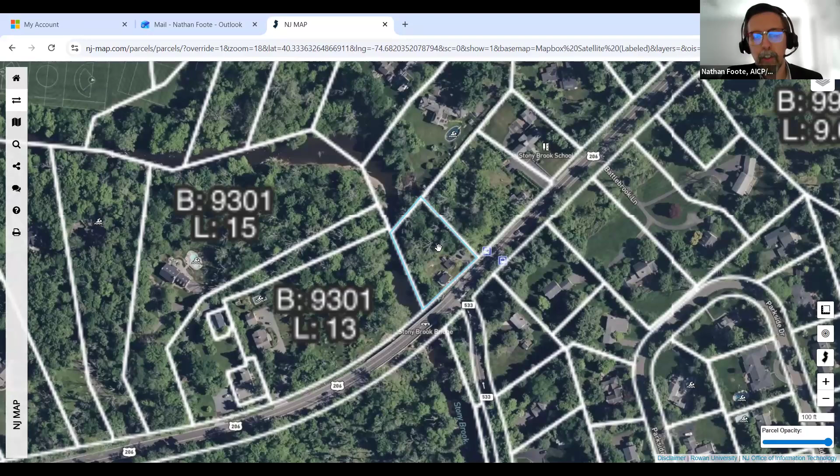Why don't we treat this as a formal hearing? We'll mark this as exhibit PB1. If you could identify it - yes, sorry, I had that in my notes and forgot to say it. This is an overhead image, a map from the NJ Parcel Explorer website, created by Rowan University. Thank you, and it's an overhead image of the two properties in question, with lot lines delineated for the lots in the area. Correct.

So now moving on - I've stopped sharing. Planning Board approved the findings of fact for the project on December 19th, 2024. Per the municipal land use law, an applicant has 190 days to record the subdivision with the county before the approval expires. Therefore, the original deadline to file the subdivision was June 19th, 2025. The applicant requested an extension on May 30th of last year, and the board granted that request at its meeting on July 17th.

Of 2025, and the resolution for that was adopted September 4th of last year. The resolution concluded that the board voted to extend the filing period to be determined by the board upon further application once NJDOT approves the subdivision plan and the dedication. The length of the extension will be the time period occasioned by the NJDOT delay. For clarification, NJDOT is the New Jersey Department of Transportation.

The main reason for the involvement of DOT was there was right-of-way being dedicated, from Route 206, which is under NJDOT jurisdiction.

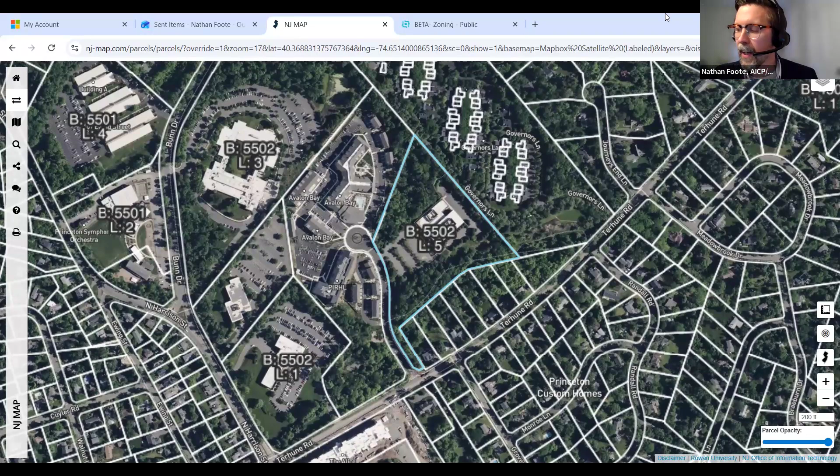I see, okay, fine, this will be the first one. Okay, so this will be PB1. Yep, so this is an overhead image of the subject property along with the surrounding area, prepared by the NJ Parcel Explorer website, prepared by Rowan University. And as with the previous image that we had for the Wascow extension application, this has the property lines and identifies the roads as well. So as can be seen here, you can kind of make it out.

It's highlighted in blue. It is an irregularly shaped lot identified as 29 Thanet Circle and is Block 5502, Lot 5 in the municipality's tax maps. The property has frontage along Thanet Circle, although a portion of the lot, it should be mentioned, stretches along the Thanet Circle frontage down towards Terhune Road, as can be seen here. It is currently developed with a multi-story masonry building that you can see towards the rear center of the property.

This masonry building was previously utilized as an office building, but is currently vacant. The property is also developed with access drives off of Thanet Circle, as well as parking lots to the front and rear of that existing masonry building.

The property is located in the AH14 Affordable Housing 14 zone, which was established in 2025, that is last year, and amended earlier this year.

The property is adjacent to the IRA Inclusionary Rental Apartment District, developed with the Avalon Princeton Circle apartment buildings. It is also next to the RSA Residential Senior Affordable District, developed with the Princeton Senior Living Affordable Apartment Building. The Governor's Lane multifamily housing neighborhood, located in the OR2 district of the former township, is to the east and north of the site. Several single-family houses fronting Terhune Road, located in the R5 district, are to the immediate south of the bulk of the property.

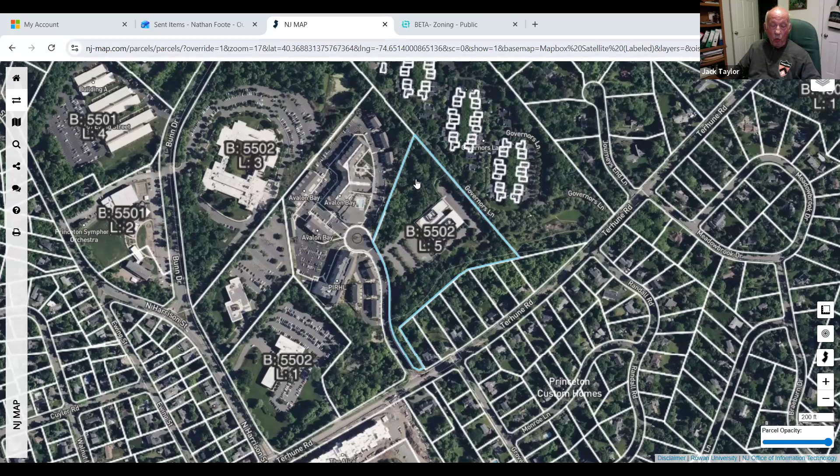Although I'm a regular driver on Terhune, I've done it 100 times, I've driven by this site so many times I can't count. And what I never really focused on is Harry's Brook. This morning when I took a walk through the woods, I was absolutely amazed at Harry's Brook, how wide it was at the very top, how deep it was, how wet it was in places. And the location of the tributary that's referred to is literally in the front steps of the building that's about to be constructed. So could you show on the map where Harry's Brook is and where the tributary is? Because I think given the stormwater management plan and related issues, we need to know that.

Certainly. So I can't identify Harry's Brook on this overhead image, but I will point out the tributary that Mr. Taylor has noted. That runs roughly where the cursor is moving right now, and as mentioned, it does go in front of the existing building. There are a number of easements on the site, several conservation easements included, which does include that tributary, both on the north side of the property where the tributary runs through, and then in front of the building, and then over through to the south side of the property. So that's the tributary that runs through it.

Harry's Brook, what I might do is just defer to the applicant to show that in their presentation. I believe they would be showing that. I will also note that both Mr. Purcell, our acting land use engineer, who's already spoken on the Wasco application, as well as our stormwater management consulting engineer, is also on this call to provide feedback and testimony.

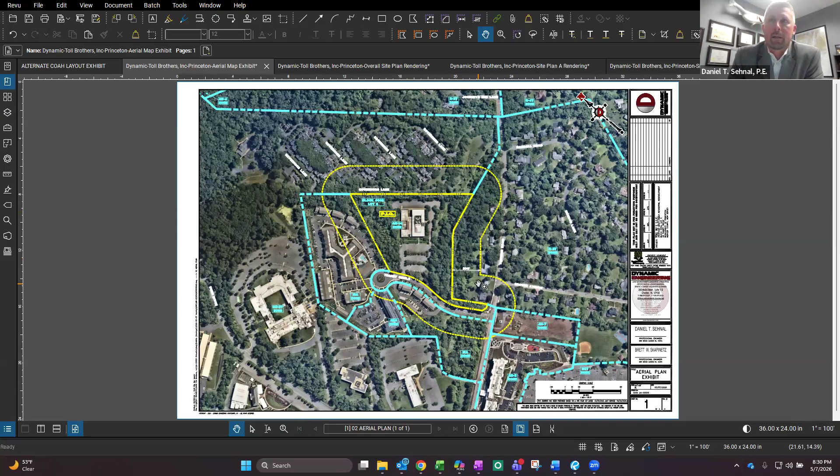Well, off the top of my head, I'm not sure what slide number this is, but this is an aerial plan exhibit, essentially showing the existing conditions of the subject site and the surrounding area. It's more or less identical to the aerial map included in the site plan set in conjunction with this application. It is identified as the aerial map exhibit with today's date, May 7th, 2026. Just for orientation purposes, north is considered to the top right-hand corner of the page. The subject site itself is identified in the center of the site, the irregular shaped lot you heard about already, in yellow, the bold yellow line with a Thanet circle at the bottom of the page.

So you've already had an opportunity to hear about the surrounding neighborhood and the zoning, so I'll bypass that information.

The site itself is just over 9.25 acres in size. The unnamed tributary, as you heard, goes from a northern direction to a southern direction, where it connects into the Harry's Brook tributary branch 2, which runs on the easterly property line of the subject site.

Thanet Circle makes up the main site frontage. It's a cul-de-sac with 2 travel lanes plus bike sharrows, under the jurisdiction of Princeton with a 25-mile-an-hour speed limit. The site also has a very minor frontage on Terhune Road, which has 2 travel lanes in either direction under local jurisdiction with a 25-mile-an-hour speed limit.

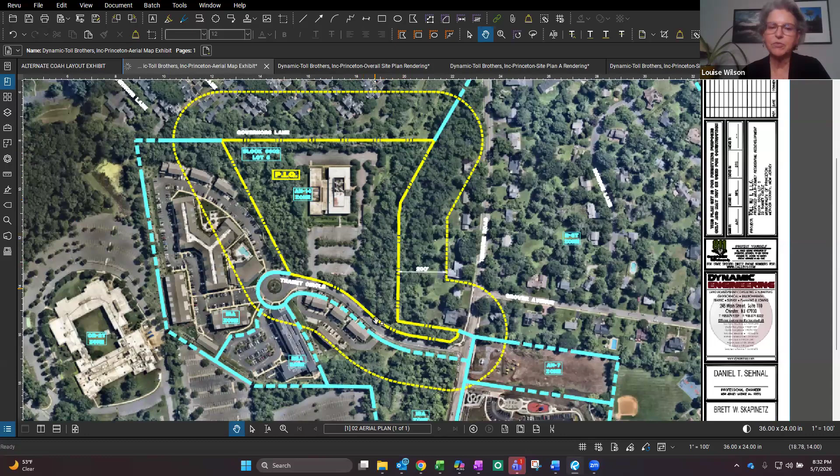I'm sorry to break in, but you noted that Harry's Brook runs on the easterly side of the property, but I think you mean the southern part. Do you not? Yeah, southeasterly. It runs west to east, roughly, right? Yes, correct. Okay, so this is the southeasterly property line, and you have northeasterly at the top. We're skewed a little bit with the page orientation, but you're all right. I'm sorry, I didn't mean to interrupt the flow.

If anybody has questions, feel free to interrupt, I do not mind. Access to the site is currently provided via 2 full movement driveways, one at the northern end of the Thanet Circle frontage, the other covered by tree canopy, opposite a couple of the townhomes for the Avalon Bay development. Pedestrian access includes a sidewalk along Thanet Circle, which provides pedestrian access through the site.

The site currently has a vacant multi-story masonry office building with a footprint just over 30,000 square feet, and there's an associated parking area for about 190 vehicles.

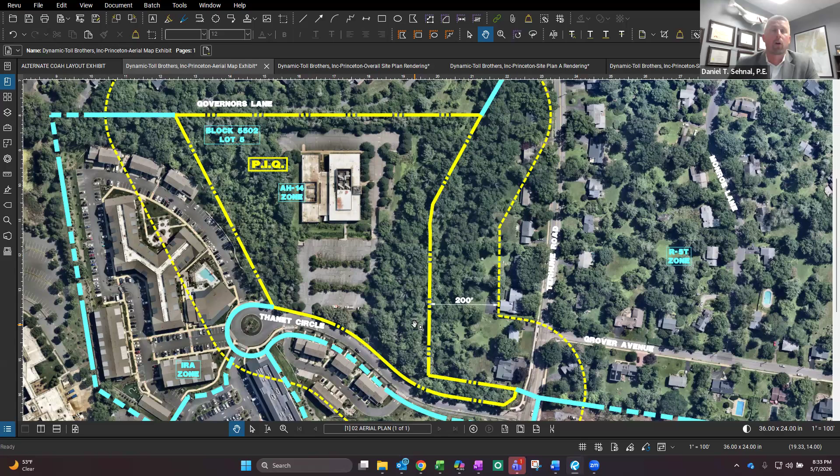There are 2 on-site bridges. One is located on the southern side of the existing office building and is for vehicles. Right in front of the existing office building, there's also a pedestrian bridge, which provides access over the top of the tributary that goes through the center of the site.

The front and rear of the site are moderately sloped towards the brook. The highest point of the site is along the rear property line, up along Governor's Lane, about 20 feet higher than the low point of the bridge that crosses the brook. Along Thanet Circle, that's about 10 feet higher than this bridge. So the site is almost shaped like a funnel.

All the stormwater goes towards the center of the site, where it's collected by various existing inlets and conveyed to an existing detention basin. There's an above-ground detention basin located in the easterly corner of the site, which captures the majority of the stormwater runoff generated by the site. It holds that water back, detains it, and releases it at a controlled rate back to the tributary to the Harry's Brook tributary. So there is existing stormwater management infrastructure on this site that captures and detains the stormwater currently generated.

We did prepare a phase 1 environmental site assessment here. No areas of concern were identified. We also have a wetlands LOI from the New Jersey Department of Environmental Protection. There are some wetlands on the subject site, which run adjacent to the tributary going through the center of the site. Those wetlands have a 50-foot riparian buffer, largely contained within the conservation easements associated with this site, which I'll get to shortly.

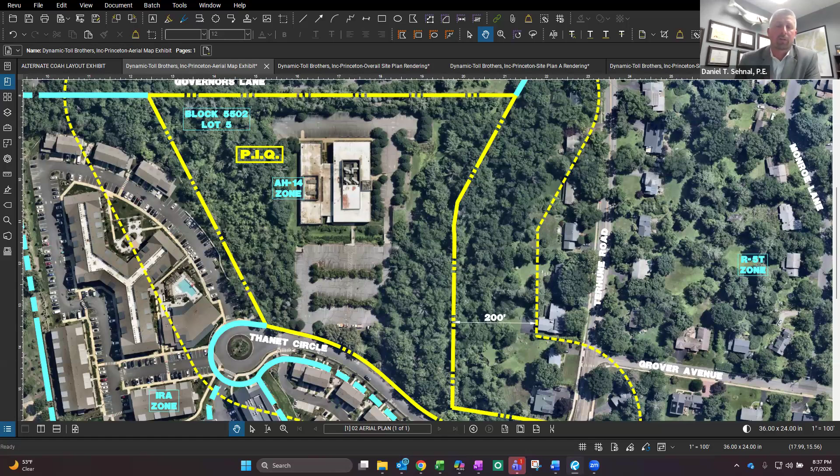With that being said, I'll take a moment to switch over to my next exhibit, unless anybody has any specific questions about the existing conditions.

That was slide 1. We'll call this one slide 2, titled Overall Site Plan Rendering, also dated May 7th, 2026. This is a colorized version of our overall site plan, which is sheet number 6 within our site plan set. Orientation remains the same.

You have Thanet Circle at the bottom of the page, and the darker shaded green areas will be the limits of the site in question. The brown or tan colors are proposed buildings, the dark gray would be pavement, and green space is obviously a landscaped area.

Under proposed conditions, we are seeking approval to demolish the existing improvements associated with the office building for the construction of 10 stacked townhome buildings, which will include 2 affordable buildings. In total, we're looking at 85 total units, 68 of which will be market rate and 17 will be affordable.

All of these buildings are alley-loaded products. This means that anywhere the building fronts on a paved surface, there is an apron providing access to garages located underneath or on the first level of each proposed building. Every single market rate unit has a tandem garage, meaning a garage that fits 2 cars, one parked in front of the other. The affordable homes have 10 single car garages, and since there will be 17 affordable units, 7 of those will not have a dedicated garage but will have dedicated parking spaces, which I'll detail further shortly.

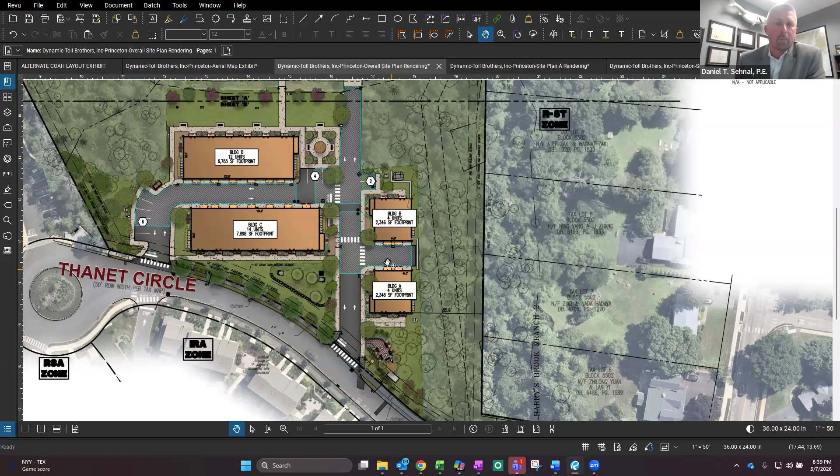Moving to the left-hand side of the page is Building C, which fronts on Thanet. The front pedestrian entrance will face Thanet, while the rear of the building will have the garage entrances. There are 14 units, each with a 2-car garage. Buildings A and B actually have a footprint of just over 2,300 square feet.

The next building, directly to the northeast of Building C, is identified as Building D. It has 12 units, all market rate, each with a 2-car garage in the alley, and a footprint of just over 6,700 square feet.

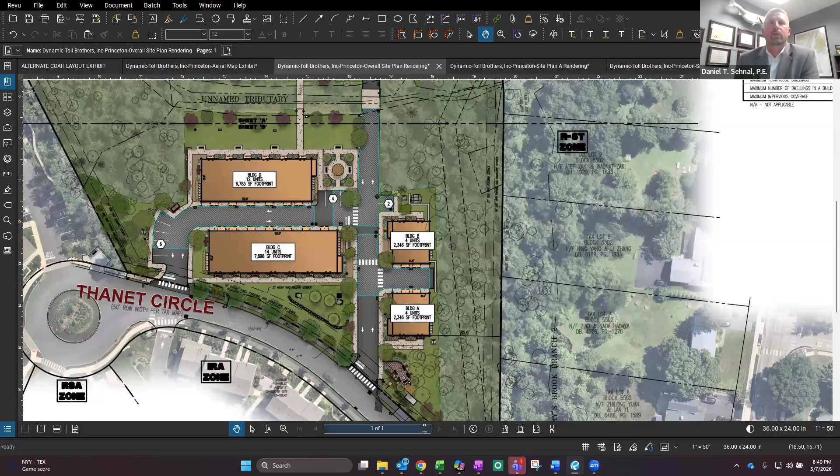Moving further to the northeast along the site and crossing the unnamed tributary, you have Buildings E and F. Both are identical, with 6 units each, 6 tandem garages, and a footprint of just under 3,500 square feet.

Building G and Building H are affordable buildings. Building H will have 7 COAH units with 4 1-car garages and a 4,300 square foot footprint. Building G has 10 COAH units and 6 1-car garages.

Moving further to the northeast, Building I is the same footprint as Building D, which is at the frontage of the site - 12 units with 12 tandem garages. Finally, to the northern corner of the site, we have Building J, 10 market rate units with 10 garages on the bottom floor.

The market rate buildings are 4 stories and have a height of 44.5 feet above the finished floor of the building. The COAH units are 3 stories. Affordable units are 3-story buildings with a height of about 36 feet above the finished floor elevation.

Based upon the municipality's definition of building height, Building D is going to be our highest proposed building. From the existing grade measured around the perimeter of the building, we're looking at a height of 46.1 feet, which is still below the compliant 50-foot maximum height for this zone.

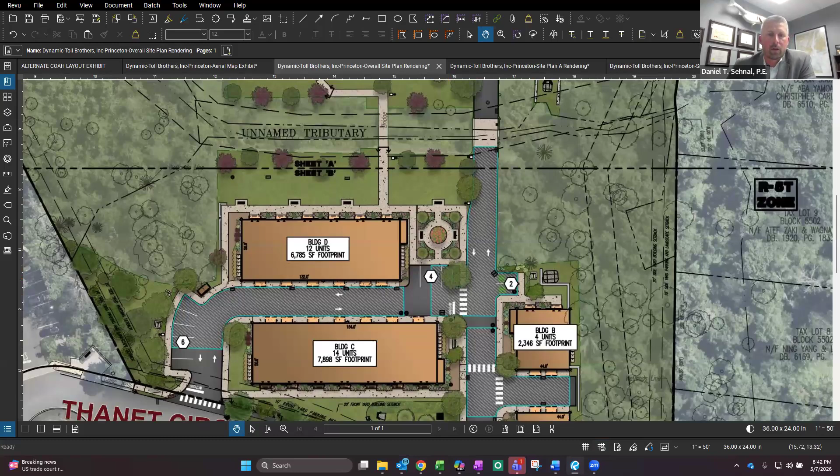Moving on back to access. Access to the site remains exactly the same as you see it today. We'll still have the 2 full movement driveways in the same location they're located today. Both have curb cuts about 75 to 80 feet in width, with a drive aisle width of 24 feet, which is adequate and compliant for 2-way circulation.

Also important to note for access, we are proposing some improvements to Thanet Circle itself. At the intersection of Thanet Circle and Terhune Road, we will be proposing a boulevard-style entrance - essentially 2 lanes, one inbound to the circle, one outbound. Each lane will be 12 feet in width, with a center 4-foot wide landscaped median.

This conservatively complies with the residential site improvement requirements, where you need 2 forms of egress from a residential community, and this will apply to the entire residential nature of Thanet Circle. It also serves as a nice aesthetic improvement, adding green space and providing a nice residential style as you enter off Terhune Road.

It does require a little bit of widening of Thanet Circle. We have to widen the roadway to the curb line about 1 foot on either side. But we do have that nice green strip down the center to add greenery and landscaping improvements as you enter the community.

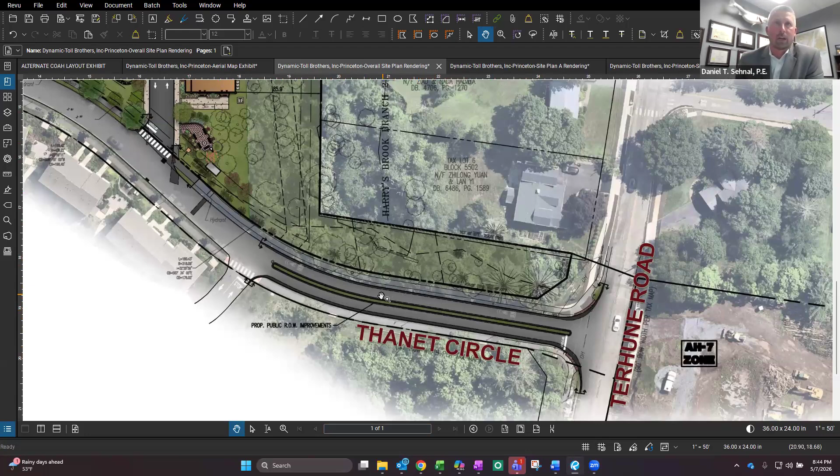Once you get onto the site, circulation is provided via a 2-way, 24-foot wide drive aisle throughout the entire site. The only place where you don't have 24 feet is at the existing vehicle bridge, which is just under 20 feet wide. However, it is still adequate for two-way traffic, since you need a minimum of 18 feet - we're just under 20, so two-way traffic still works.

The intent is to maintain the existing vehicle bridge as well as the existing pedestrian bridge located directly to the northwest of it. Both bridges were evaluated by a structural engineer and identified as in safe and working order. We are potentially replacing the pedestrian bridge with a new one, but the proposal is to just resurface the existing vehicle bridge.

Other than that, the rest of the site has 24 feet in width. We'll have granite block curbing - full height curbing - anywhere around the site. We also have concrete curbing proposed for any depressed and flush curbs, for ADA compatibility as well as maintenance along the entrance aprons to the garages for each unit.

We ran vehicle circulation throughout the site. The site is able to accommodate a 35-foot long garbage truck, as well as Princeton's 47-foot long ladder truck, with full availability to circulate the entire site and access each of the proposed units. We have 6-inch thick reinforced concrete aprons in front of all the garages, providing access into the garage.

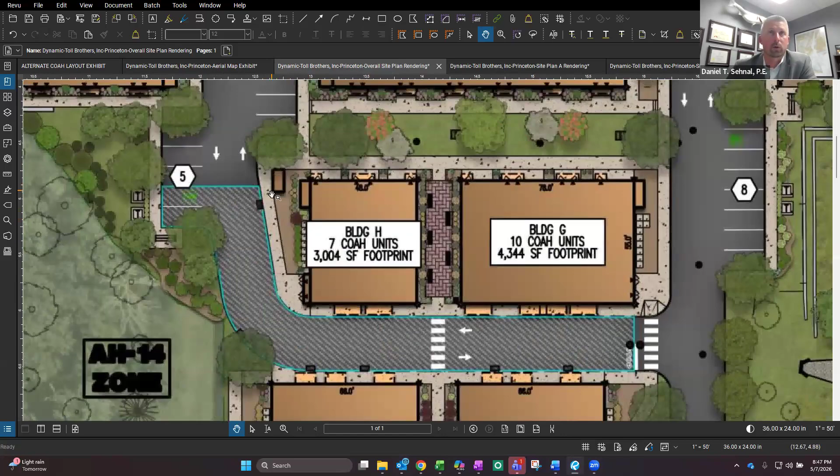We have mailboxes proposed near Buildings D and H. For H, there's a mailbox directly at the northern corner. On the bottom portion of the site, there's another mailbox proposed just to the west of Building D. No trash enclosures are proposed.

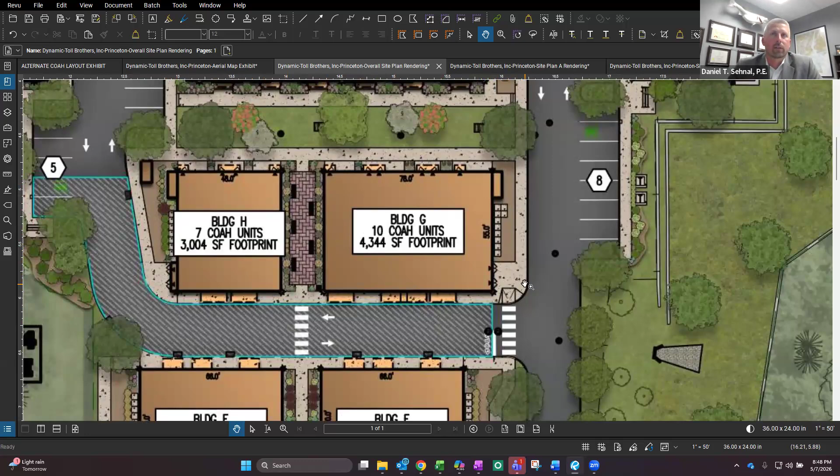All trash will be stored in the garages in typical residential-style trash cans for the market rate units. For the affordable units, we have proposed trash closets at the western corner of Building H and the southern corner of Building G. This is where trash cans will be stored for those units, still accessible to all residents, allowing them to bring their trash to a single location. A private hauler would then come and pick up all the trash cans at the bottom of everyone's driveway aprons and from the affordable unit trash rooms.

In general, the redevelopment is completely within the limits of the previous disturbance from that office building. So we're staying completely outside of the deed-restricted conservation easements—we're not disturbing that area at all.

All in all, the improvements result in a net increase of just under half an acre of new impervious surface coverage, increasing the existing coverage from 27% to 32% of the site, which is still compliant with the maximum of 45%. However, to mitigate the increase in impervious surface coverage, we are proposing a complex stormwater management design that complies with current municipal and state level stormwater regulations.

This includes modifying the existing basin, adding 5 new pervious pavement basins, as well as an additional new above-ground bioretention basin, which I'll touch on a little bit later on.

As far as grading, the proposed site has been graded to maintain existing drainage patterns, provide ADA accessibility throughout, limit disturbance of the surrounding area, and protect the environmentally sensitive areas of the site.

To achieve this, we have 6 new retaining walls proposed around the site. This allows us to tie into the existing grade while protecting the environmentally sensitive areas, the surrounding properties, and as many mature trees as we could.

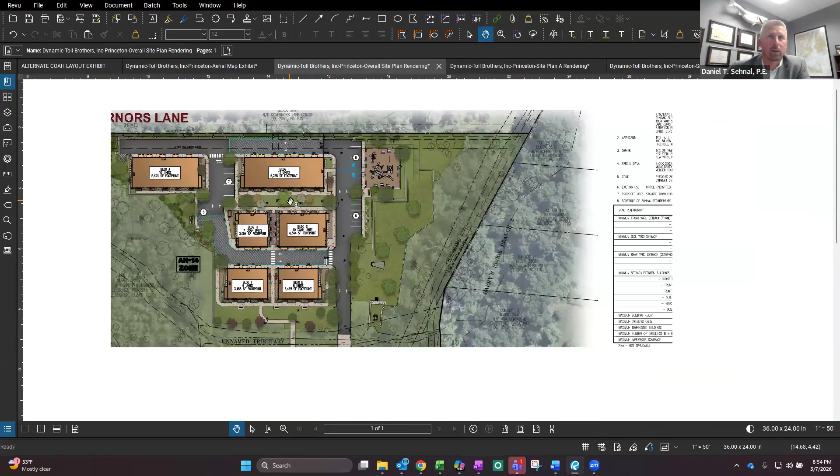It is obviously the closest accessible route to the playground, and there is also an accessible route using the blue painted crosswalk, providing access to depressed curbs and the fully ADA compliant sidewalk throughout the site. So maybe it's not the closest parking space to some of the buildings, but it does provide full accessibility from those spaces throughout the site. More than happy to talk about that in more detail - I'm sure there will be some questions.

Minimum parking space size is 9 by 18, and we are fully compliant with that. For any of the parking spaces for the 7 affordable units that do not have garage spaces, the applicant was willing to reserve parking spaces for those 7 units to make sure they have a parking space close to the unit when they do not have a garage space.

Daniel, can we interrupt for one second? Of course. You talked about a calculation showing there's adequate parking on the western portion of the site and the eastern portion, but can you be more specific? Was there a ratio of visitor parking per dwelling unit you were shooting for? It's hard for us to know what's dedicated surface parking for units versus visitor parking. Can you tell us what you've got specifically in visitor parking on both sides of the site?

So the rear of the site, starting on the eastern side, we are required to have 90 parking spaces overall. We have 106 proposed. In that area there are 51 units total. For those 51 units, you're required to have 0.35 visitor spaces, so 51 times 0.35 equates to 18 visitor spaces. In the rear of the site, there are 28 visitor or surface parking spaces.

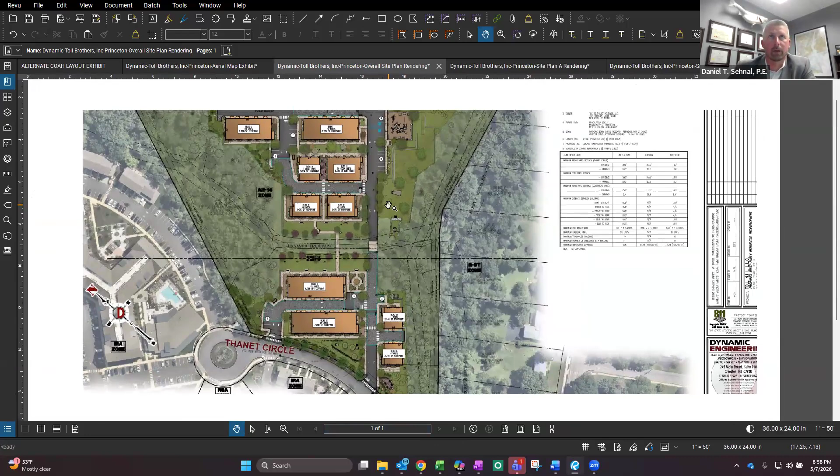2 of them directly to the east of Building B, 2 of them up near the playground, and another 2 directly to the northwest of Building H. At least 22 of the garage parking spaces will be EV or EV make ready. But being in a garage, if a resident has an electric vehicle and wants a charger in there, I'm sure accommodations can be made. We'll make sure we comply with the state requirement.

For bike parking, 1 bicycle parking space is required for each 1.6 bedrooms, not units, but bedrooms, for a multifamily dwelling with 3 or more dwelling units in the municipality. Overall we have 205 bedrooms proposed for this development. This equates to 128 bike parking spaces required. We have 138 bike parking spaces.

Of that 128 required, 80% need to be long-term, so 80% of 128 is 102. 20% need to be short-term, so short-term of that 128 is 26 spaces. Long-term bike parking is accomplished by storing the bikes within the units themselves. Our project architect can point out a little better how they propose to do that.

As far as short-term bike parking, we have 3 bike racks proposed throughout the site: one directly next to Building C, another up near the playground, and the last directly to the northwest of Building H. Each one is capable of storing 18 bikes.

This is detailed on our bike rack detail, page 24 of our site plan set. Essentially it's your standard old school bike rack that has a single grate in the center, and you're able to park bikes from either side, head-in 90 degrees to that edge. You can see in the detail there's essentially 2 slots, so the bikes alternate one side versus the other. So they're capable of fitting 18 bikes.

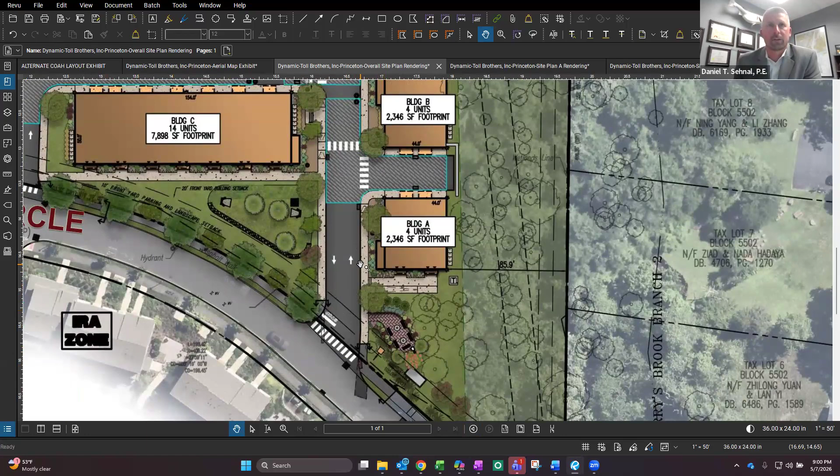As far as signage, we have one proposed monument sign, directly to the south of the southern driveway entrance into the site. This is fully compliant with the zone's monument sign requirements. Essentially it'll be a 4x4 brick pillar that's 8 feet high, with a cantilevered sign hanging off of it. Very decorative in nature, really not meant to advertise the site, more of a site identification feature, letting visitors or pickups/drop-offs identify that this is the entrance, and it will match the architecture of the building itself.

The sign face, the sign hanging from that cantilever, is only 10 square feet, so very small. They'll have a small solar panel external light to illuminate it, facing down to help throw some light on the sign itself.

Stormwater management, I'll be brief since I'm sure there will be more questions on it, but essentially we designed our stormwater management system to comply with New Jersey soil erosion and sediment control standards, the municipality of Princeton, as well as state standards. This development meets the definition of a major development due to disturbance greater than a quarter acre, as well as the new impervious surface coverage.

So in order to comply with stormwater management requirements, we take a look at 3 main things: quantity, quality, and stormwater groundwater recharge.

So what we do to study our site is look at the topography in order to establish the drainage areas and figure out where the water goes under existing conditions. This is known as our point of analysis. In this case, our point of analysis is the unnamed tributary that ultimately flows to Harry's Brook tributary.

After that, we also study the soil properties and the ground cover. We use this information to establish our existing runoff rates for the various design storms in order to get our starting point for how we need to design our stormwater, and this includes our groundwater recharge volume.

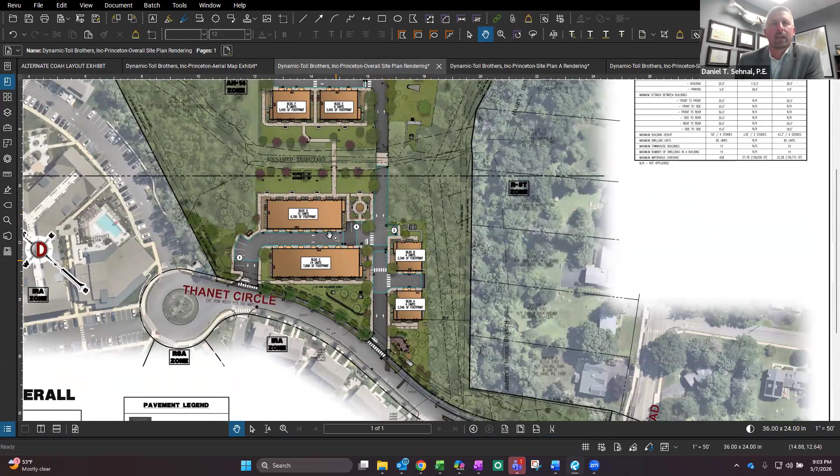Once you get to the western side of the tributary, there are 3 more pervious pavement basins: one in this area before you get to the bridge, one more between buildings A and B, and finally the 5th pervious pavement basin between buildings C and D.

Pervious pavement accomplishes 2 things. It collects the surface water generated by the motor vehicle surface. This is considered dirty water because you have grit, oil, sand, and everything else that comes off of car tires. It filters through the pervious pavement.

The pervious pavement captures any impurities of that stormwater. Below the pervious pavement system, there is essentially gravel, which acts as a stormwater detention system, detaining the stormwater and releasing it at a controlled rate.

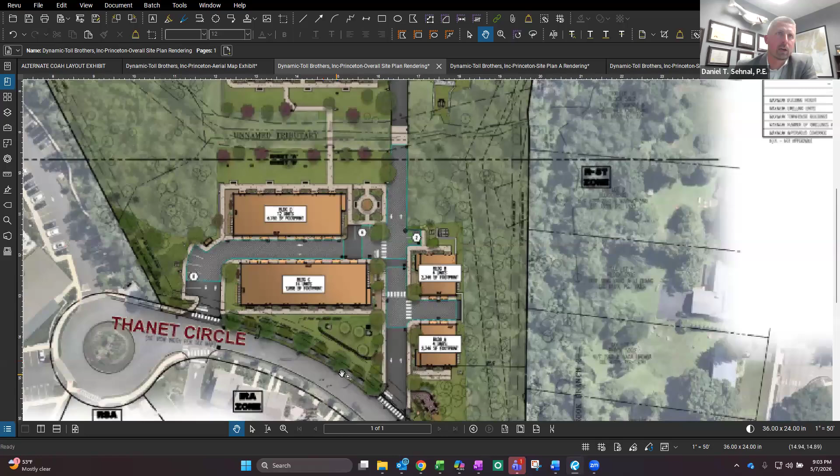In addition to those 5 pervious pavement basins, we have a proposed bioretention basin, located right along the frontage of the site. Really what it's going to look like is a depression with some plantings in it. So it's meant to capture stormwater.

It's meant to treat the stormwater by allowing it to percolate through the soil layer of that basin, but it just looks like a planted area. So you have wet-site tolerant plants and trees that will look nice, but it also treats the stormwater and again acts as a detention feature.

And then finally, as I mentioned earlier, we have that existing detention basin located at the eastern corner of the site. That existing basin will be upgraded from a standard detention basin as it is today to a bioretention basin as well. So this basin will also be revamped to have some nice plantings in it, which again will accomplish those two things of cleaning the stormwater, detaining it, and releasing it at a controlled rate.

By utilizing these basins that we propose, we do fully comply with the state and local stormwater standards. I believe Mr. Scupian and Puricell both have some minor comments at this point, but there's nothing we feel we cannot overcome. I think this is a design that functions well and meets all of the requirements and will be able to accomplish that need.

And still, we'll end up seeing a reduction in stormwater rates when compared to existing conditions for the stormwater leaving this site. As far as groundwater recharge, we actually have poor soils in this area.

Under existing conditions, no water is really able to get back into the ground, and under proposed conditions that stays the same, so no change there. But with these additional green spaces at the bottom of the basin, if there's any opportunity for some of the stormwater to get back into the ground, that's great. If not, all of the basins have under drains, meaning you won't see these basins sitting wet for a long time. There's still another way for stormwater to exit the basin if it's not able to percolate through the soil, and this is fully compliant with state and local regulations.

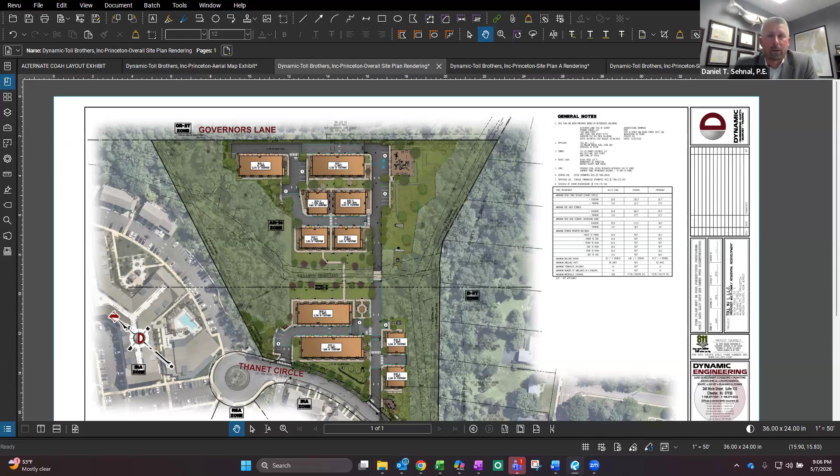As far as utilities to the site, we have confirmation from all the utility providers that service is available: gas, electric, water, and sewer. Gas will be provided off of Thanet Circle. The electric will be provided from both Governors Lane, there's an existing easement to the benefit of the subject site that'll provide service to the eastern side, and we'll get electric service off of Thanet Circle for the western side.

As far as water, we have already reviewed the design with New Jersey American. We'll have a fire service and a sprinkler or domestic service to each of the proposed buildings. We're also proposing a fire hydrant at the northern limit of the site to provide fire service to those buildings. We will need DEP approval for BWSE.

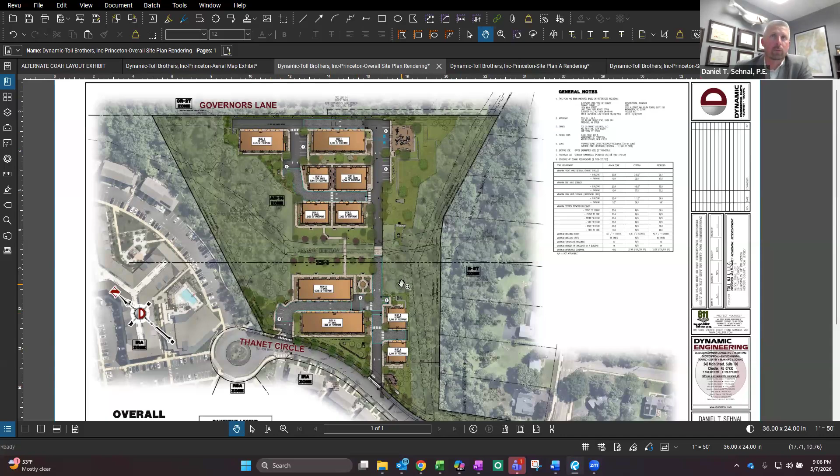Finally, for sanitary sewer, we're providing two separate connection points. There's an existing manhole directly to the east of the existing vehicle bridge. We'll connect into that sanitary manhole, which discharges flow towards an existing municipal-owned easement along the southern side of the property. That'll collect all of the sanitary sewer from the eastern side. The western side of the development will discharge sanitary sewer to the main within Thanet Circle.

We'll also need DEP approval for treatment works associated with this site, but it's essentially an administrative approval since we already have confirmation that the treatment facility and the municipality have availability to service these subject sites.

Lighting for the site: we do have site lighting proposed, designed to comply with IES and Princeton lighting standards for residential use, to provide adequate lighting, safety and security while trying to minimize off-site glare and protect environmentally sensitive areas.

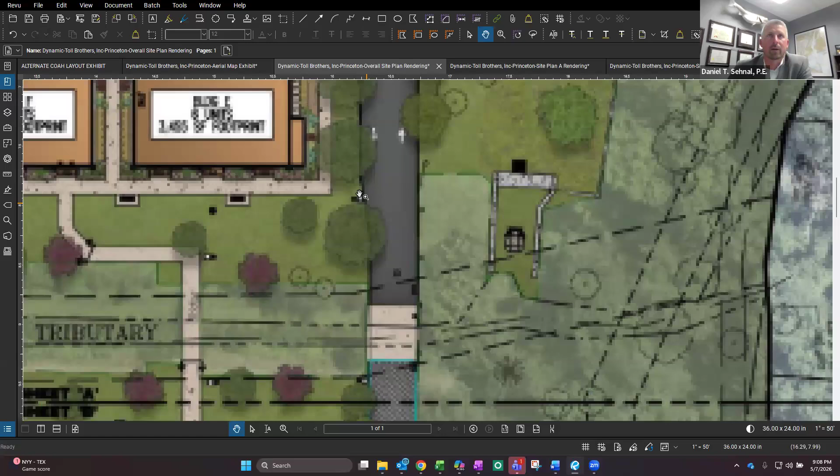We have 20 pole-mounted decorative style LED area lights located or mounted at 14 feet above grade. You can see them on the site plan identified with these symbols near the trees. There will also be 46 building-mounted, decorative style LED lights on the building, mounted about 22 feet above grade.

All of these lights will be full cutoff fixtures, meaning they'll be dark sky compliant, with no uplighting impacting light pollution. We're making sure we comply with the light levels at all the property lines. Again, a fully compliant application providing energy efficient lighting.

Moving on to landscaping, our overall philosophy is to use varying colors, textures, and heights to create an aesthetically pleasing and visually inviting environment that complements the proposed architecture while softening the hard lines of the improvements and enhancing the overall appearance from the perspective of adjacent roads and properties. This is going to be a home, so you want to provide a peaceful and inviting site for residents and their visitors.

If you've visited any of the other Toll properties, you know their sites are very well maintained. They have nice landscaping, and it's going to be no different here. We have a substantial landscaping design, and we will look to maintain that.

We will have to take some trees down for the proposed development, disturbing the existing office complex. We're looking at removing about 180 existing trees. Doing the tree calculation per the municipality, 204 replacement trees are required, and we will absolutely comply with that requirement. Right now our landscaping plan calls for 202 trees—that was a miscount on our part. We can absolutely find a home for 2 more trees to make sure we comply with that 204 replacement tree requirement.

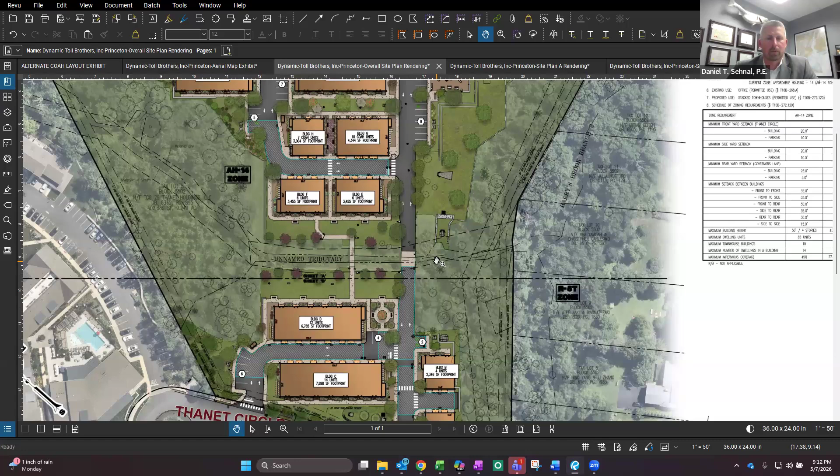As I mentioned earlier, we'll also be seeking approval from the DEP for water and sewer service. We've had the opportunity to go through the very detailed review memos from your board professionals and municipal professionals. From a site civil perspective, there was nothing I saw as a red flag, no showstoppers. Everything we saw from a site civil perspective, we can absolutely comply with, and we intend to as we continue to work towards entitlements for this site.

So, Mr. Carr, I think I hit everything, but if I missed anything, feel free to redirect me. If not, I make myself available for any questions the board members may have.

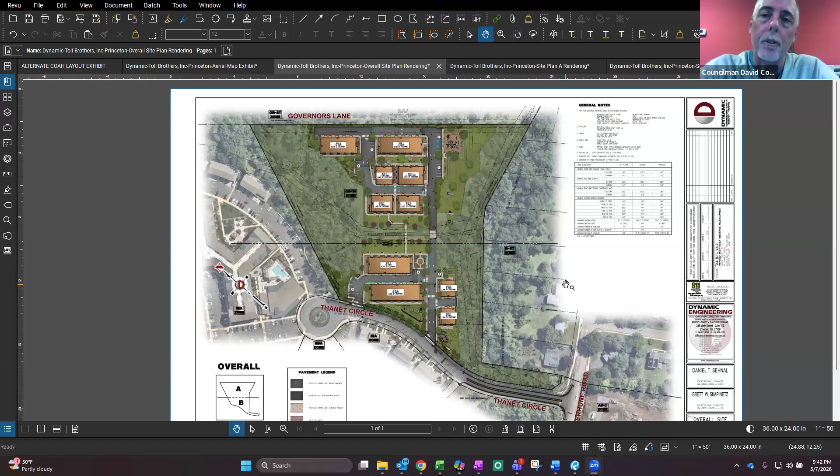There's affordable housing regulations, an ordinance that Princeton has adopted that's 50 pages long. I also want to say that the staff reports are super helpful in identifying the sorts of things we should be deliberating on. Yes, they raised dozens of issues, which are exactly the ones we should be focused on. Absolutely.

Dan Dobromilsky, or Nat, does that answer your question? I hope so. Okay, Dan Dobromilsky and then Owen O'Donnell. Thank you, this is Dan Dobromilsky. I had two questions based upon the engineering testimony.

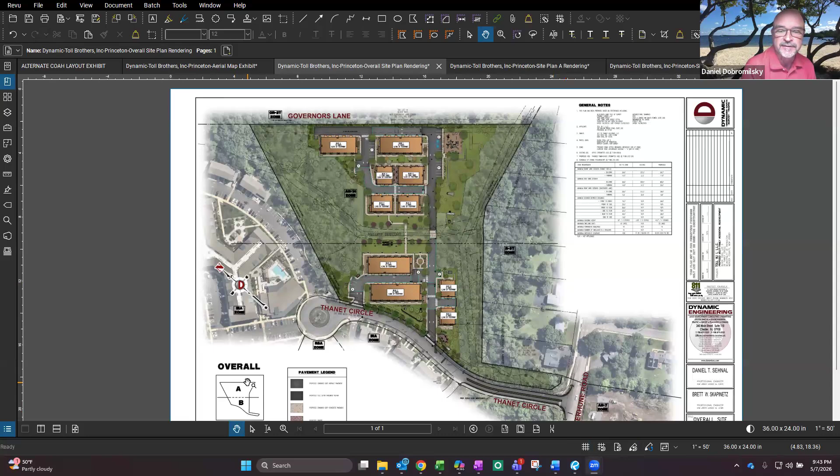The first question relates to the new median island in Thanet Circle. Is Thanet Circle a public or a private street? And what's driving the need for that median island? It doesn't extend all the way to your drives, so it suggests that it's greater than just your development, but it seems to me that you must already—the units on there must already exceed the average daily trips, under RSIS, you know what I mean?

So what really triggered this to me is that having a 3 foot wide grass strip is not the easiest thing to maintain. So if it's a public street, I'm not sure it's something the town would relish taking on. It's not that it's huge, but is it really needed, is the question. Jim's hand went up quickly, so let me turn first to Jim Purcell.

Yeah, let me explain that. When Thanet Circle was developed with the Avalon project and the Princeton Senior Living, which was called Pearl at the time, Thanet Circle, then called Thanet Road, was a mixed use roadway. By converting this office park to a fully residential community, this now becomes a residential street that must meet RSIS, and this separation of entrances so that we have the ability for emergency services to have 2 exits in case one is blocked.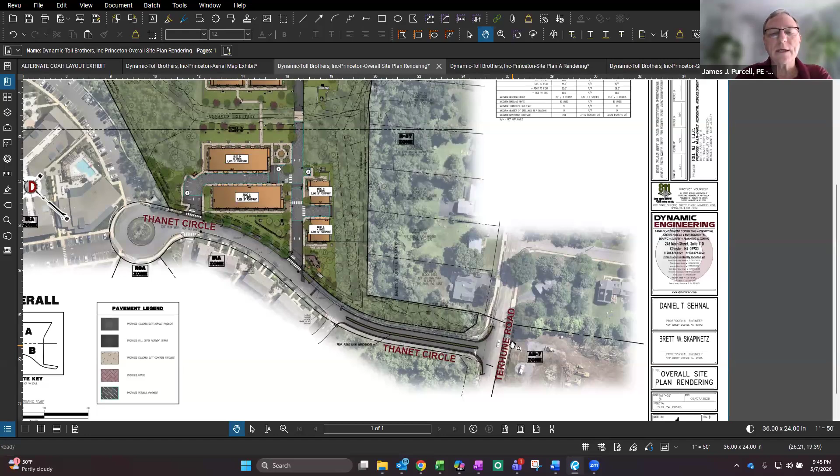And that's the purpose of the separation from RSIS. It became an issue, and this median is something that was directed by us during the concept review. The idea is that no more than 700 linear feet of a roadway can end in a cul-de-sac. So they've complied with our requirement and the RSIS requirement by providing this median. And yes, it will become a public asset and we will have to maintain it. Gotcha, all right, that answers that question.

Thank you. The second question relates to the walkway that occurs between building E and building D, across the bridge. Looking at it in the presentation where the plans are all put together, it strikes me that the walk kind of goes from the front door of a building D unit to the front door of a building F unit, whereas maybe that walkway is really intended to serve the entire community and might be better routed from the courtyard to the right of building D to the center of buildings E and F, and also to the right of building E, to direct pedestrians through the community and not from front door to front door. I'm wondering if there's flexibility to look at that and find the best route for that walkway.

So there is some flexibility, but it's minimal. You're getting close to the conservation easement within this area, and we cannot expand the footprint or change where the existing disturbance is through that conservation easement. Once we are outside of it, which is the lighter shaded areas, we certainly have a little bit of flexibility to meander that sidewalk. So we can certainly take a closer look at that.

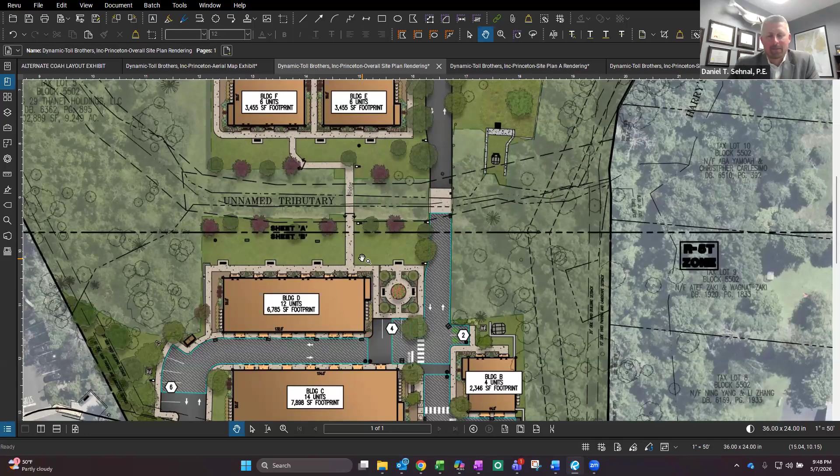Nathan, and then Jim. I know Owen is in front of me, but I wanted to piggyback off him. Oh, sorry, I thought Owen's hand went down, but there it is. Sorry, Nathan, I'm going to take Owen first. Okay, he had his hand up for a while.

Sorry, Owen. First of all, to Dan's point that he just made, I think it would also help with the handicapped parking for anybody going from the handicapped spots to those more front-facing buildings if we could move that walkway a little bit.

I also want to touch on Nat's question. Maybe it's similar, maybe totally different, but has there been any interaction with the local residents, the ones on Terhune Road and at Governor's Lane, regarding the plans? Not to my knowledge, no. Okay, we find things usually go a lot smoother when developers bring in the neighbors and get their input at an early stage. But so be that as it is.

Thanks for asking that question, Owen. Thank you. Nathan, and then Jim.

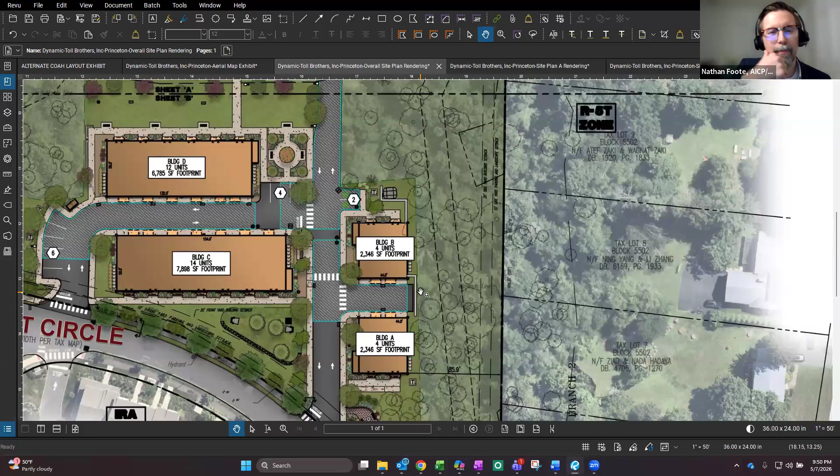I'm not sure what the full solution is, but that does seem to be a concern, and making sure the wayfinding across that pedestrian path, and getting to that pedestrian path, is going to be important. I don't know, Jim, if you had a similar comment or if it was something completely unrelated, but that was an initial thought based on the discussion that was just had.

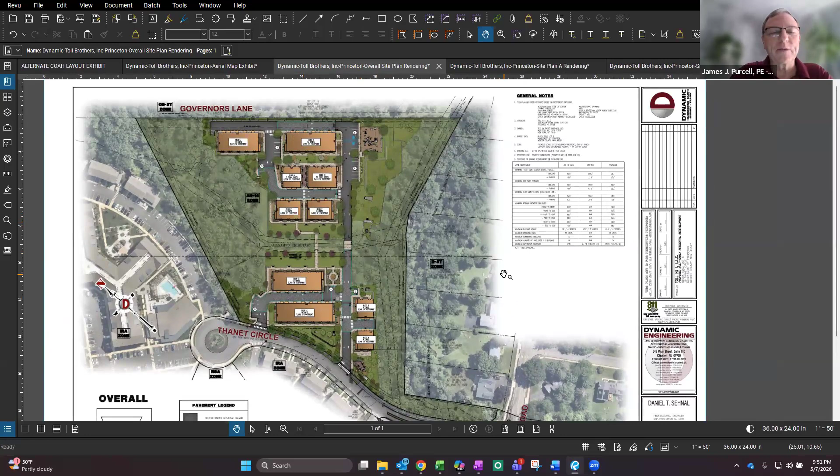Thanks, Nathan. Jim? Yeah, I don't want to testify for the applicant, but given that this is a residential development that won't see any through traffic, it really wasn't a concern of mine that residents from A and B would find the most efficient route to the playground—but maybe the applicant should address that. My biggest concern, and Dan, you didn't address it as fully as I had hoped, is that the ADA compliant spaces...

...are not linked to those ADA units, particularly the affordable ADA compliant units. My concern is that residents in the affordable units that are ADA accessible have a very long route if they're going to park a car. I would really like to see some discussion about placing the ADA accessible parking spaces in proximity to the residences, not the playground. I don't understand why they're close to the playground in the first place.

Is the playground the ADA accessible element of this entire development? I would think that the units that are ADA accessible should have ADA parking spaces in close proximity to those units, and I just don't see that. This is not, to me, in accordance with the spirit of the Americans with Disabilities Act. So I'd like to see that.

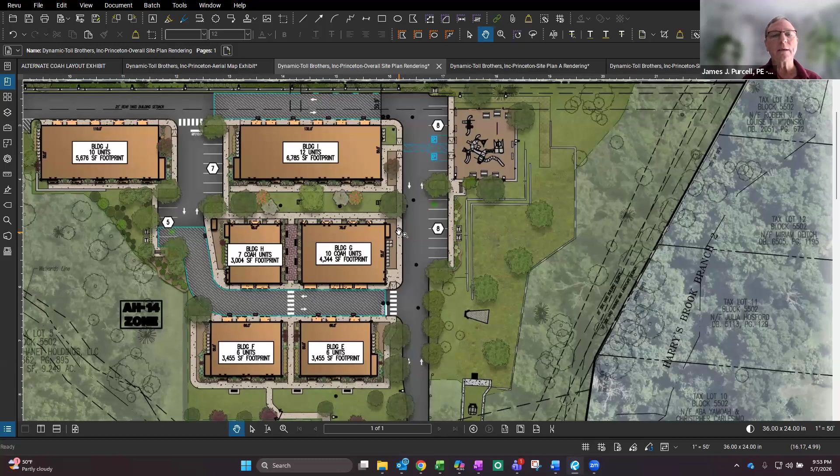So I'll attempt to address that. First, regarding the accessible affordable unit: based on the number of affordable units we have, only one is required to be ADA accessible. That ADA accessible unit does have a garage space, and that garage space is actually an oversized garage space, so you have full ADA accessibility for that unit. Our thinking for placing it by the playground is that we figured this was the most public space associated with the community we're proposing.

Looking on this side, there's actually a step. Can I interrupt you a second? Because it was not clear—that was something I don't think we've put in any of the memos, unless it was in Nathan's memo.

Is this playground proposed to be accessible to the general public, or only exclusive to this development? It's accessible just to this development. So the idea of ADA accessible parking spaces here—I don't understand why anyone who lives in this development would be driving to the playground and need the ADA accessible spaces.

I'm very concerned about the ADA accessible spaces not being on the most accessible route to the units they're meant to serve. Understood, and I'm more than happy to relocate one or two over this bank of seven. We might need additional concrete work for ramping since there's a step up on this side of the sidewalk—this is the accessible route for building I, but I could certainly take a look at that. Our opinion was that this would be the most used community space for this specific community, which is why we made those the accessible locations.

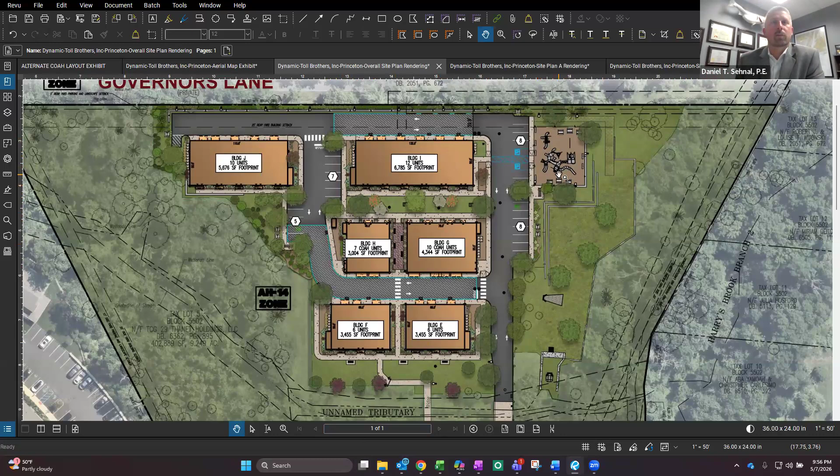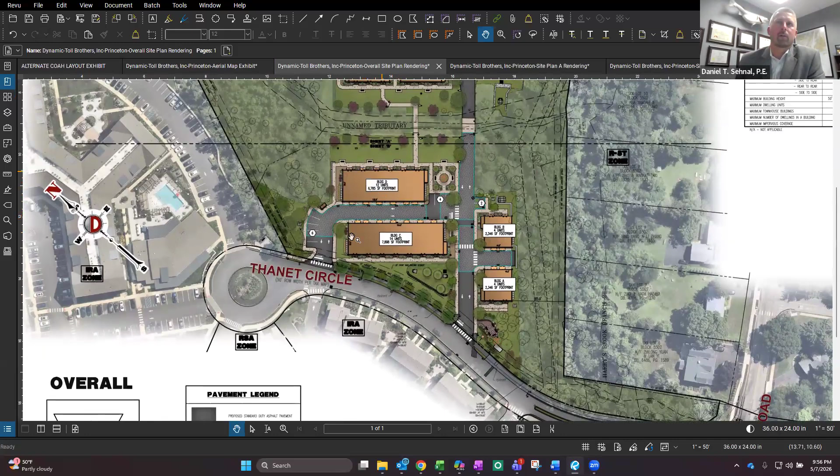We can find a home for one or both of them, together or separate. We kept them on this side versus the front because all of these units have two tandem spaces. So if you need an accessible parking space, even for a visitor, you'd likely be willing to share your unit's parking space with them—you can relocate your car to one of the visitor spaces in the frontage. That's why we located them in the back, where there's a deficit of parking or garage units, and that's the community space. But I'm happy to work with you to relocate either or both to a different spot.

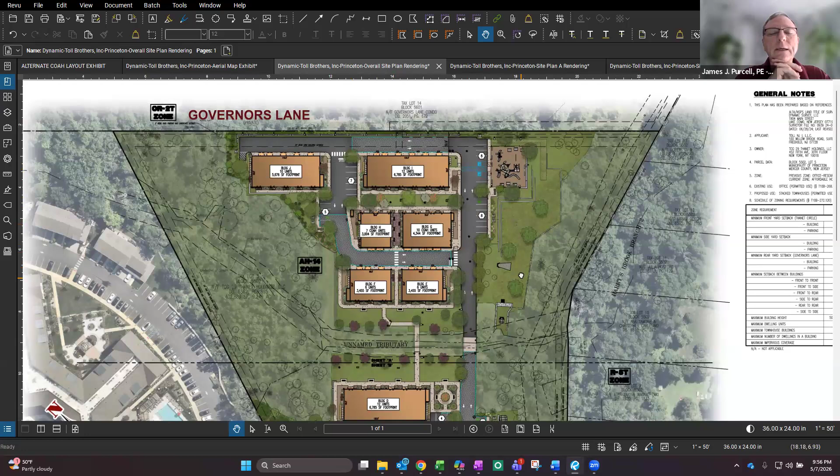We can place them over here, with direct access to these buildings. I'm happy to do that. Can I continue on this thread a little bit? Yeah.

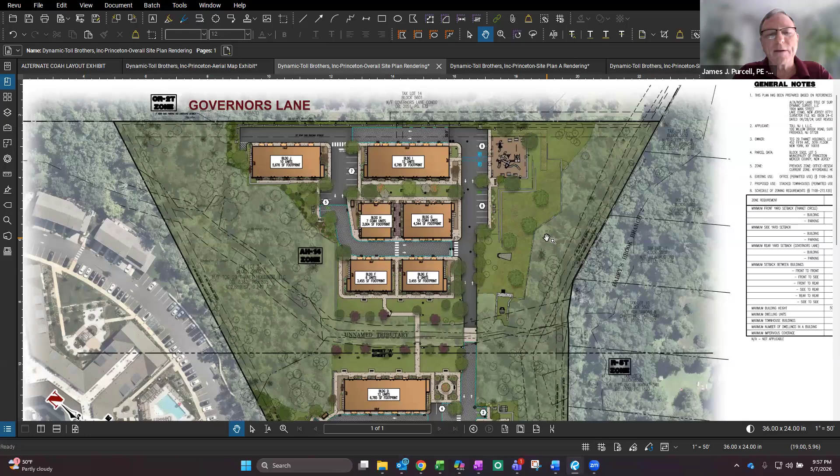You meet the requirement for the number of units and accessible spaces, but it would be beneficial if you exceeded that and included at least one accessible space on the other side. From the spirit of the whole—if I'm in need of an accessible space and visiting somebody in building C, why shouldn't there be an accessible space for me down there? You're essentially saying that if I'm a visitor with a handicap, I have to drive up the road, park at the playground, and then figure out some way to get to building C to visit someone.

This is about visitor parking. It's not just about that—it's about both. It's about having accessible spaces for accessible units, but also accessible spaces for visitors. And this doesn't meet that requirement as far as I'm concerned.

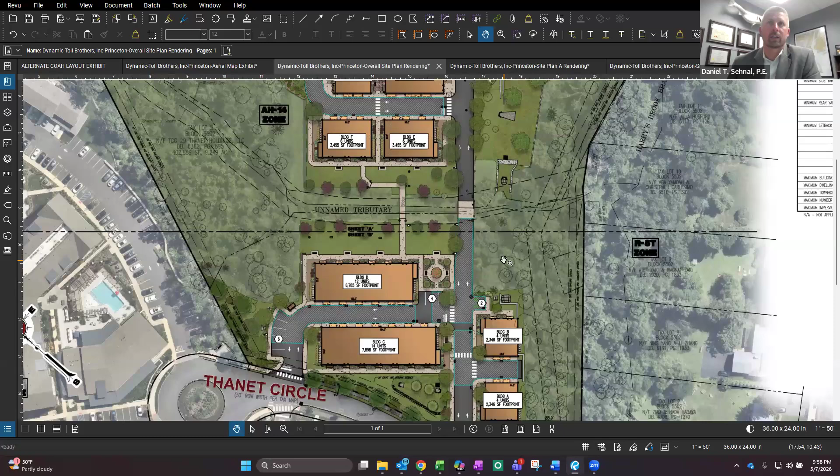Understood, we can certainly take a look. Truth be told, we're tight on space—we're up against our conservation easements in the front and really maxed out on developable space. But maybe we could shift some things around and find a home for one more space without sacrificing any of the other visitor spaces in the front. I'm sure there's a way we can do it. We can get creative if that'll address your need.

For what it's worth, I strongly agree with Mr. Purcell, and I think you have more spaces than are required, so it's an issue that's fixable.

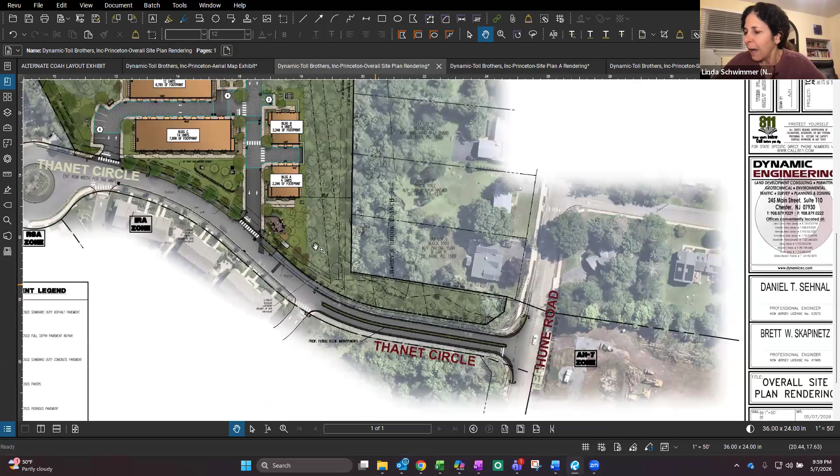As I was reading through everything in preparation, there was a laundry list of items that staff recommended we require be explicitly promised or stated as included should we move forward to recommend this to the council. I don't remember all of them, but I agreed with all of them. I don't want to list them all, but in this discussion tonight it would be good to know if there are things you explicitly agree to, or any listed items you absolutely do not agree to, or if you agree to all of them, so we can put that into the record — whatever the process for that would be. I did see a lot of what I thought were important requirements listed there.

That's a really good thing to ask for — what of all of these things do you not agree to do? Because those are really important things, and they end up affecting the resolution and conditions, et cetera.

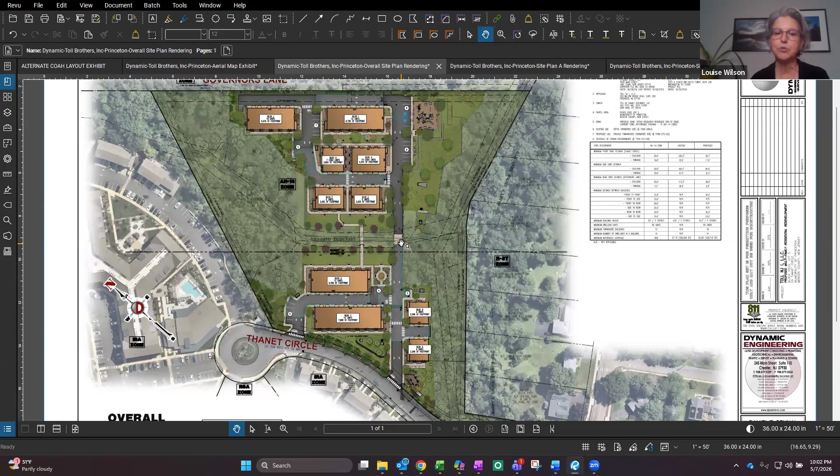But I do want to make clear that we're not recommending anything to council. Our action that we take tonight, or at a future meeting if we don't finish tonight, will be action on a preliminary and final major site plan. This is our approval to make or not, with conditions or not — we're the deciders.

Got it, okay. So then, going back to what will you agree to or not agree to on that list — and related to that, I also wanted to revisit what Mr. Purcell was just asking about parking. There was a mention that there's only one accessible spot based on the number of spaces — one handicap spot for the affordable housing, and one affordable COAH unit. Right, or I'm sorry, accessible.

I wanted to press on that a little bit, because given the priorities in low-income housing laws for people with disabilities, I wonder if that's good enough for the people who might be moving in here. Thinking about accessibility and use of the building, it's not just a general population thing — it's a special population thing to consider for use, need, and accessibility.

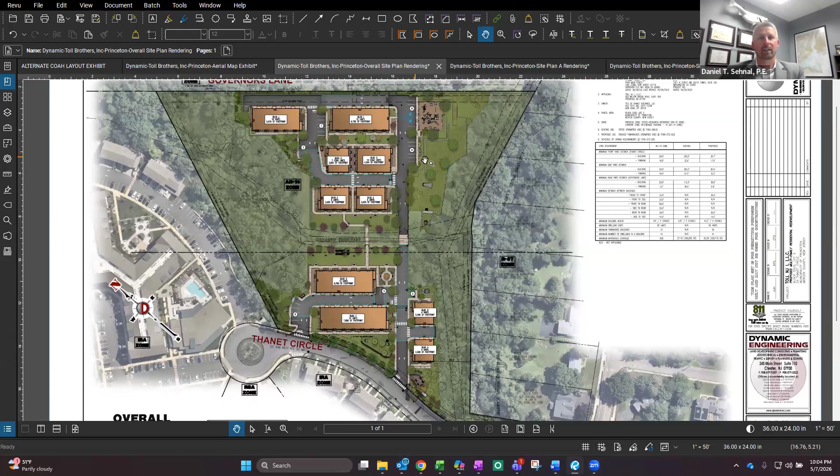I'm going to interrupt quickly because that is what I was asking you, Dan — I apologize, it wasn't an engineering question. We don't have a good handle on which units are ADA accessible. You testified to which ones have an accessible garage, but I'm concerned about the ones that don't have interior parking spaces and have to rely on surface parking that may or may not be accessible. I think that's something we'll hear from the architect. And just to remind everybody, we're quizzing the engineer on the site plan with questions that may be answered in further testimony.

And after all of the testimony, the Q&A, and public comment, or maybe before then, at some point, back to Linda's first question, we would like to hear from the applicant which of the suggestions made in the professionals' memos you decline to or would make an argument against accepting.

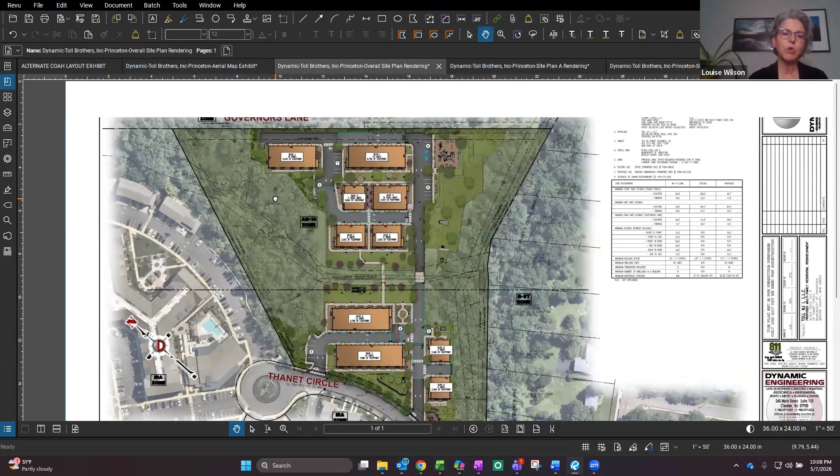On the north side of the roadway bridge, that tributary is really, really heavily vegetated with yellow iris — such that if we had a flooding event, it would definitely slow down the water, which would be great. It might actually form almost a dam. So I just wanted to flag that, because when you're working with DEP on the buffer areas and stuff, it may be wise to remove at least some of that yellow iris that's in the

stream bed. And on the downhill or south side of the roadway, in the same tributary stream bed, there is Phragmites and other invasive stuff along the stream bank. That Phragmites was the most concerning to me. So, as you are planning for how to make that buffer area work better, those things need to be taken into account. And is that something you're going to do with DEP, or how does that work?

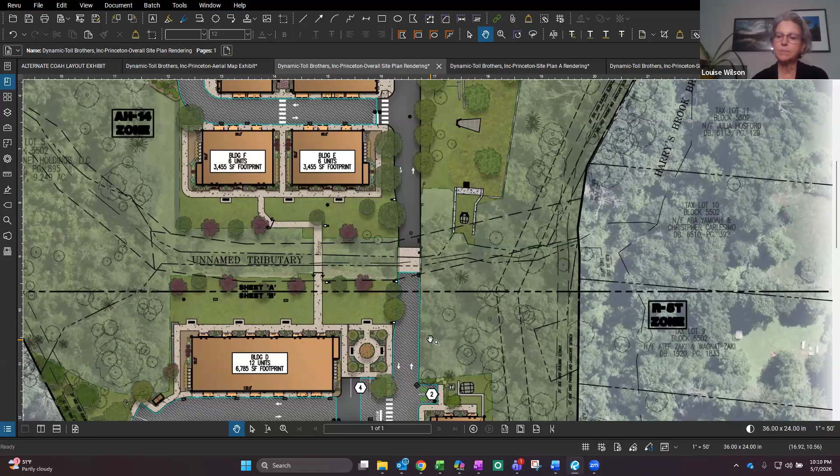So, coincidentally, one of the easements that follows along this tributary is a township or municipal stream cleaning easement. So it actually gives the municipality the right to access the site and clean it. From DEP's perspective, that is a general permit — we can apply for general maintenance and stream cleaning. Honestly, I wouldn't be surprised if they make that request. We will be submitting for general permits to reestablish the existing riparian zone that was impacted by the previous development, so we are restoring the green space with natural and native plantings. And when they go out to the site to visit, as they always do with any application, I wouldn't be surprised if they identify the same thing you did and request that stream be cleaned out. We can absolutely investigate that from our end as well.

That's easy enough. And I think that would help the aesthetics of the site, make it look a little better for the residents, get rid of some invasive species, and certainly helps the flow of the stream and doesn't inhibit the stormwater flow. So it's a good idea.

And the basin that you're retrofitting to become a bioretention basin already has a ton of vegetation in it. I thought I was going to see a mowed area with a low flow channel, but that's not what's there. I saw in the plan that you're adding trees — I assume you're leaving in place the trees that are already in that basin, is that correct? Most likely we won't be able to, as this basin is going to be completely revamped. We have to rip up the bottom and install under drains, but it's going to look a lot better than it does today. We'll put in native, wet-site tolerant plantings that have the ability to withstand the water and thrive in that environment. It's not going to be your typical sand bottom infiltration basin.

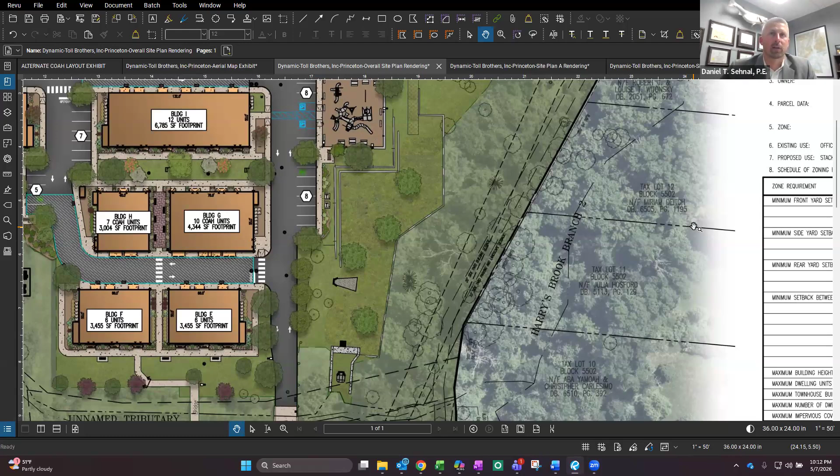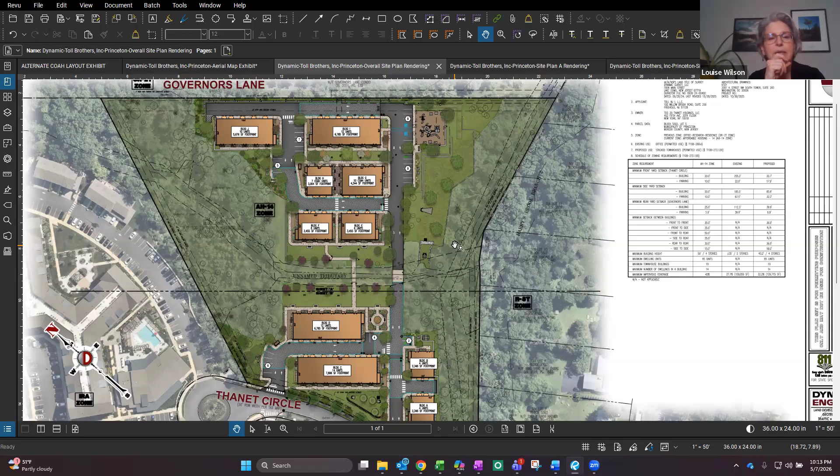So it's not going to be like one of those ugly basins on the side of the parkway — this will be a landscaped area with an additional function of stormwater management. Well, don't get me wrong, I don't think it looks terrible today. There's a couple of spots with standing water, which I found surprising even after that silly little drizzle we had that was supposed to be rain. But there's cattails in there, and it's not a terrible mess. And if you don't need to take out one of the bigger trees — I think there's a river birch of considerable size on the edge of it — maybe that could be saved. We're happy to work with the arborist and our landscape architect to see if there's a way we can work around those existing mature trees to maintain them. It's certainly something worth investigating.

I had a concern, as was flagged in Mr. Dobromilski's memo, about substituting native species for some of the landscaping that's non-native. And I guess, when we get to that point, when we've had a lot more testimony, I think it'll be a good idea to discuss whether or not we ask you to come to the landscape committee rather than try to iron out every last detail about landscape before a vote is taken.

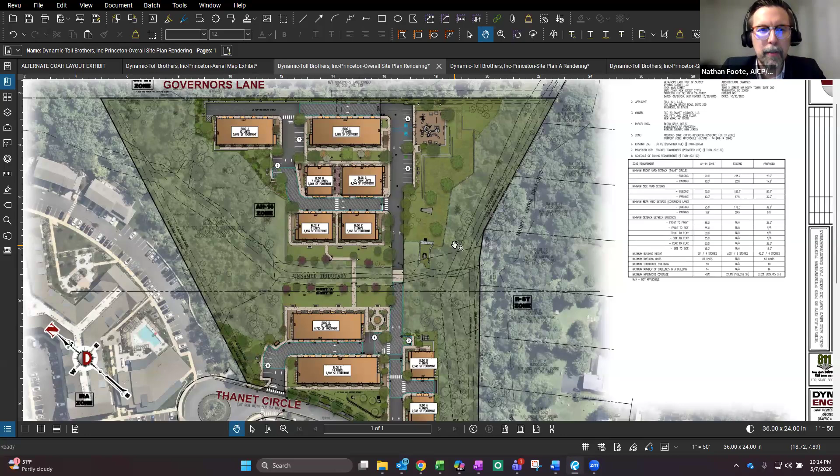Are there other questions for Mr. Sehnal? I just want to get clarification — I believe it was testified that each of the affordable units that do not have their own garages will be provided a designated parking space, is that correct? That's correct. And where are those going to be located? Most likely we'll put a handful of them over in this area and then the other over in this area or up here, so they'll be the closest spaces to those affordable units. We're not going to throw them somewhere far away or put them all the way up here or anything like that.

Thank you. So actually, one other quick thing, and maybe this is an architecture question — were you done, Nathan? I'm sorry, I didn't mean to. Oh no, yes, I was done. Okay. I'm curious about the placement of all of the affordable units in two buildings and all of the market rate units in the other buildings, and why there isn't more of a mix-it-up kind of approach.

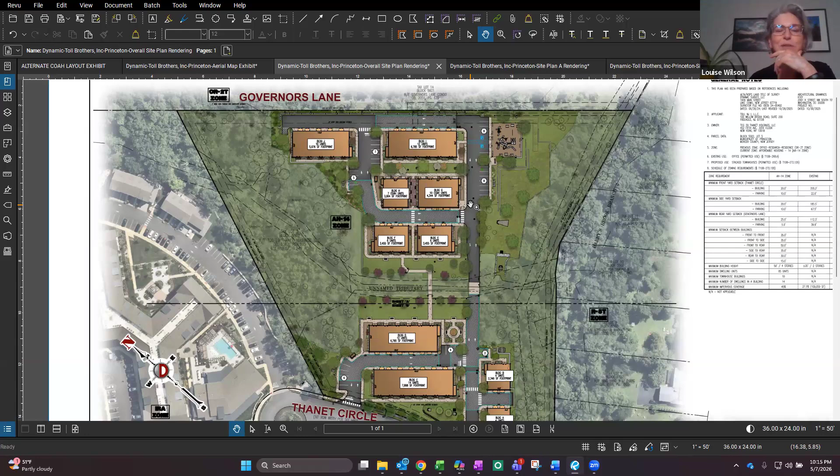And also, I wonder whether the open area between — if I get close enough to the screen to see where your cursor was — between building I and buildings H and G, whether that can be used as a seating and meeting area rather than what looks like a paved area in between buildings H and G. Do you see what I mean? To have more of a community connection between and among those three buildings.

We saw the center of these two buildings as a good spot for a seating area because you get some decent shade there, and growing larger trees might be difficult in that tighter alleyway. In addition, we're trying to comply with the ordinance requirement that wherever you have front entrances of two buildings facing one another, they need to be separated by a courtyard with a lot of green space. Specifically, the code reads that courtyards shall be predominantly pervious and liberally landscaped, and shall be designated with walking paths connecting the entrances to the residents and the neighborhood. So we're trying to avoid adding more impervious surface, using it mainly as walkways and making it as green as possible. That's why we avoided putting seating and a large plaza area between the two front-facing buildings.

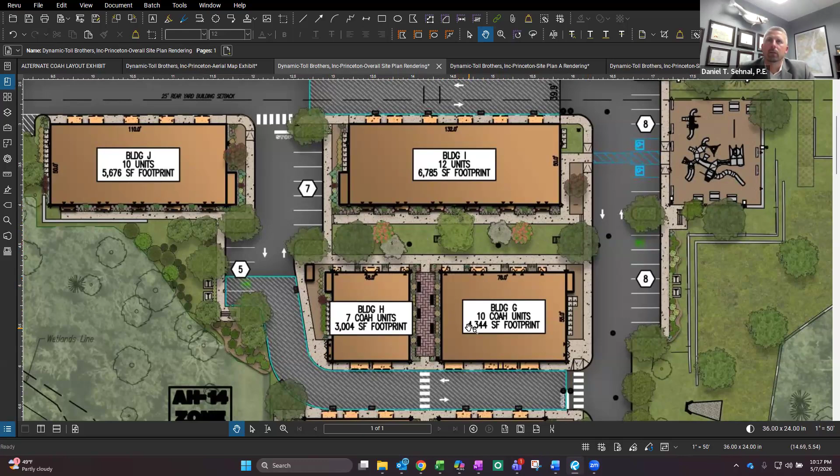Do you envision seating around the periphery for people who want to just sit and look into the woods?

We did provide some seating, especially along the tributary. These are all benches, same thing on the other side, so they're able to face the re-landscaped natural drainage area. There's some benches near the playground area, and then we have two seating areas, one next to building D, and then all the way down near Thanet Circle, which is tucked away in a nice wooded area. We tried to provide seating in areas that are as scenic as possible for the site, utilizing that natural area around the unnamed tributary in the site center.

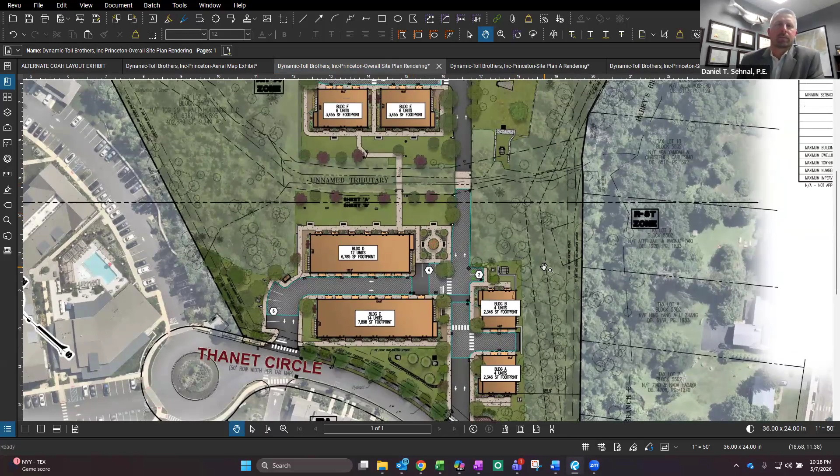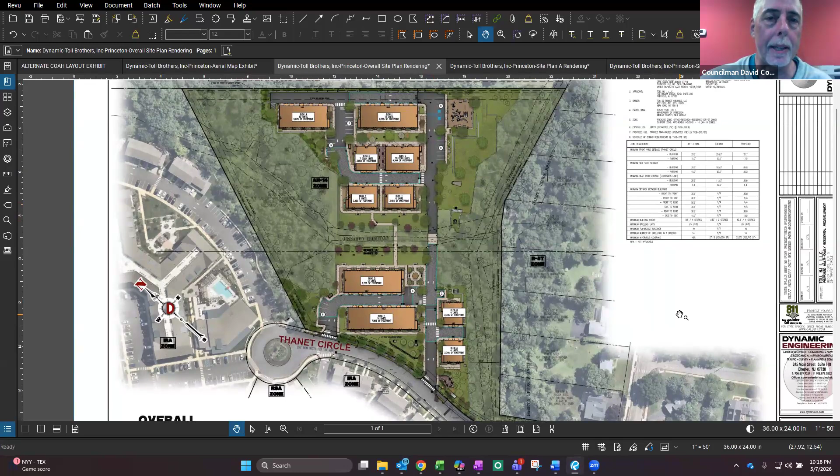I just wanted to offer an answer to your question about the clustering of the affordable units. The difficulty is that with all the different bedroom count distributions required for the affordable units, you end up having unit types that don't fit naturally into a stacked townhome repetitive arrangement. So intermixing the affordable units with the market rate units in a project of this type is difficult, which is why the affordable units are in their own buildings.

I was involved working with Toll to come up with the concept plan here. We felt that because these aren't internal hallways like a conventional apartment building where residents would naturally interact, the outdoor green space between building I and buildings G and H becomes that hallway - the public space where people will be circulating to their units. We felt this arrangement would actually give a lot of opportunity for the affordable unit residents to socialize with market rate residents. I'm just sharing that insight from our thought process as we worked with Toll on the layout.

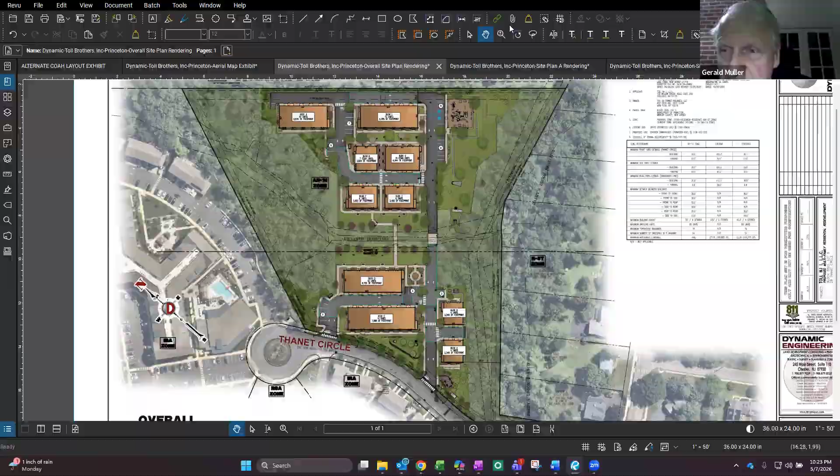State your full name and spell your last name. Certainly, it's Corey, C-O-R-E-Y. Last name is Chase, C-H-A-S-E. Principal with the firm Dynamic Traffic, located at 245 Main Street in Chester, New Jersey.

Corey, you're a professional engineer licensed in New Jersey. That's correct. I previously appeared before the municipality on the Avalon Bay application, the Pearl application, and I also worked on the Alice as well. A trifecta. Yeah, got them all. So again, I believe those particular jobs would qualify him to be an expert for this job.

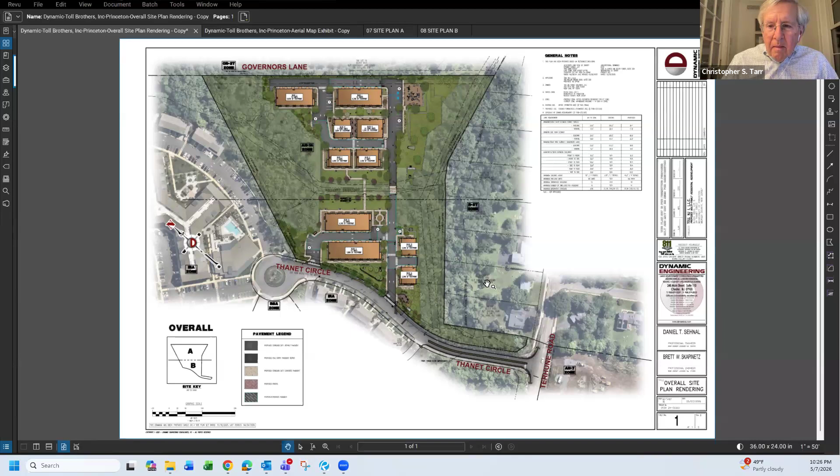And thanks, good evening everyone. Madam Chair, members of the board, it's great to see everyone again. My testimony will be focusing on slide 8, the overall site plan rendering, the same slide that Mr. Sehnal just provided the majority of his testimony on.

As Mr. Sehnal indicated, primary access to the proposed residential development will be off of Thanet Circle. The access points will be located largely in the same location as the access points to the existing office building. We did provide a traffic impact study, which was previously submitted to the municipality. It was dated October 31st, 2025, and did a pre and post development analysis at the Thanet Circle intersection with Terhune Road to analyze the overall traffic impacts of the redevelopment of the subject property.

Notwithstanding the fact that the site was previously occupied by an office building, and understanding it's currently vacant, we didn't take any credit for the traffic that could potentially be generated by that former office building. But utilizing data published by the Institute of Transportation Engineers in the 12th edition of the Trip Generation Manual, which is the current edition, the proposed residential development is projected to generate a maximum of only 48 trips during the weekday evening peak hour. That's approximately less than 1 trip per minute during that peak period.

That level of traffic generation in and of itself would not constitute a significant increase in traffic as defined by the New Jersey Department of Transportation. They have a threshold of 100 additional trips during a peak hour as what they term to be a significant increase in traffic, so we're roughly 50% of that threshold. We also did a pre and post development analysis at the Terhune Road intersection with Thanet Circle and found there are no degradations in the levels of service from the pre to post development conditions.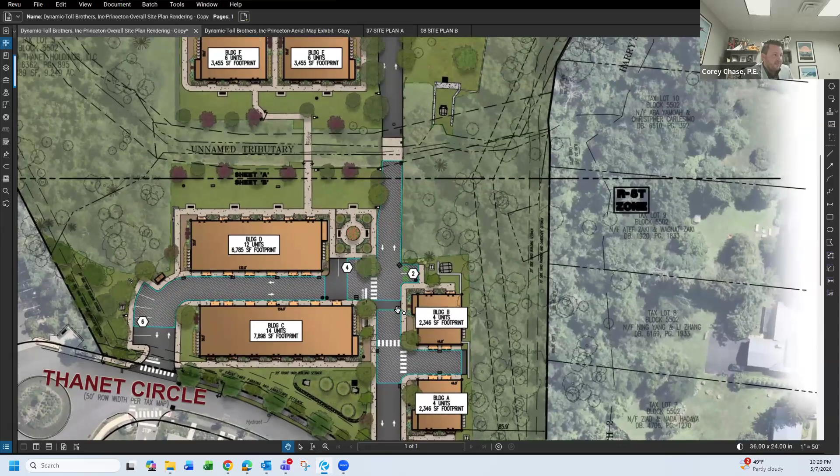We also took a look at the site access and circulation. As Mr. Sehnal mentioned, there are dedicated pedestrian sidewalks throughout the entire development, circulating the majority of the buildings, as well as providing a connection between the eastern and western portions of the development over that pedestrian bridge. We are providing high visibility pedestrian crosswalks at each of the internal roadway intersections, providing safe and efficient access for both vehicles and pedestrians throughout the entire network.

I know there was some discussion in Mr. Purcell's letter as to the access to the playground. That was strategically located along the eastern portion of the development, in the northeast corner. It's going to be the most low traffic vehicular area of the property. You're only going to have vehicles either visiting or accessing building I and building G potentially circulating in this area, so very minimal vehicular volume here.

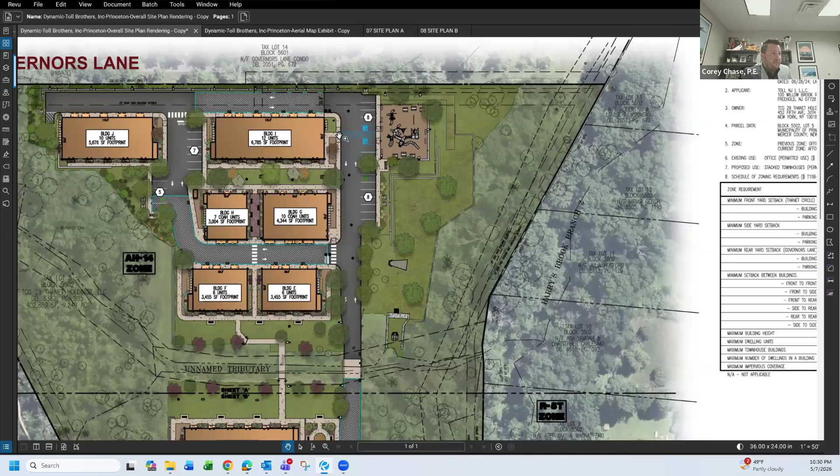So providing that playground in this area really limits the pedestrian and vehicle interaction you're going to see in this crossing. As was mentioned by Mr. Sehnal, there is a dedicated pedestrian pathway, so anyone in buildings A through D would be able to utilize that pedestrian bridge and the internal pedestrian network if they choose to access this playground by foot. We feel this location, given the crossing provided, will certainly provide safe access for both tenants of the facility and their children to access this playground area.

As Mr. Purcell mentioned at the onset of the hearing, Thanet Circle, as part of the Avalon Bay development, was designated a bicycle boulevard. It was restriped and re-signed to indicate through signage as well as sharrows within the existing roadway that it is in fact a bicycle boulevard. So we will have the ability for tenants of this facility to access Thanet Circle and utilize that bicycle boulevard designation to attain the rest of the municipality's bicycle network on Terhune Road and Grove Street as well.

Madam Chair, that's all I had for direct testimony. Mr. Carr, I'd be happy to touch on anything you think I may have missed, but I'd open myself up to any questions the board may have or its professionals may have.

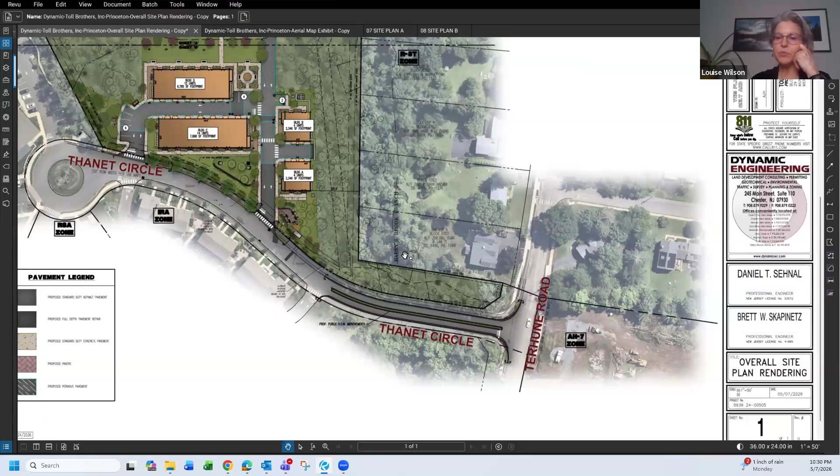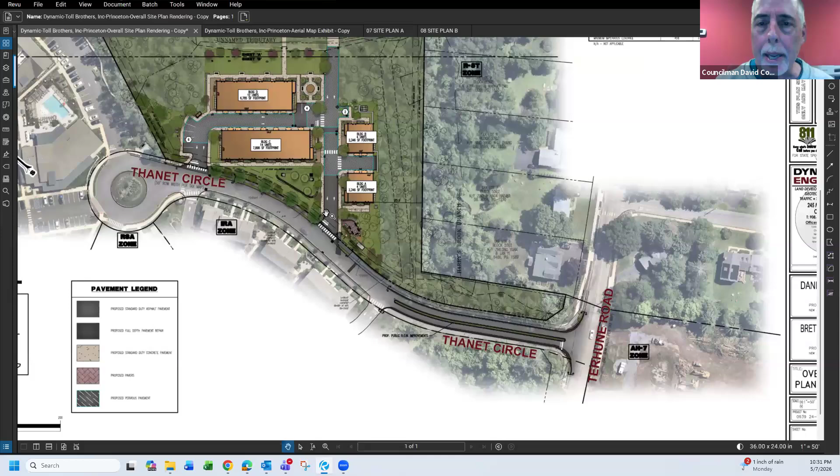Okay, thank you. Are there questions from board members for Mr. Chase? David Cohen? Yeah, in terms of the bicycle circulation through the development, if a bicyclist is less confident and doesn't want to ride with the cars in the travelways, what's the width of your sidewalks, and would they be comfortable riding on the sidewalks through the site?

Mr. Sehnal, correct me if I'm wrong, but the sidewalks are 5 feet in width, so if a bicyclist did feel less comfortable and did not want to utilize the existing travelway, they would be able to utilize the sidewalks to traverse the site. Even better, some of them are 6 feet — the majority of them, the main ones, are 6 feet.

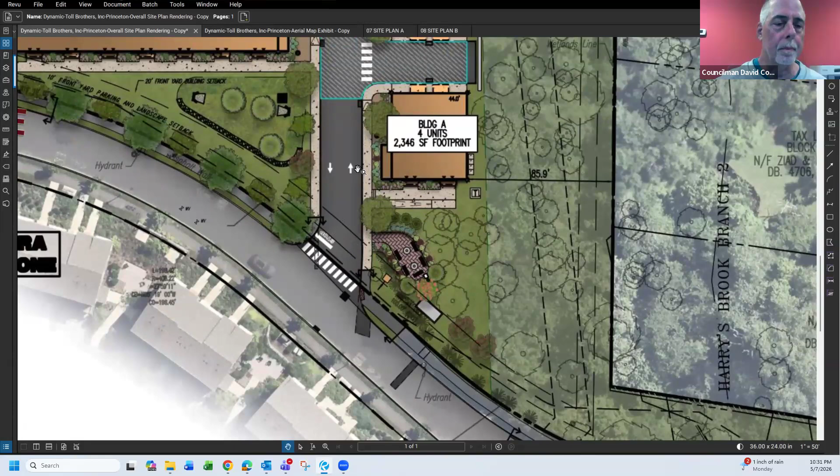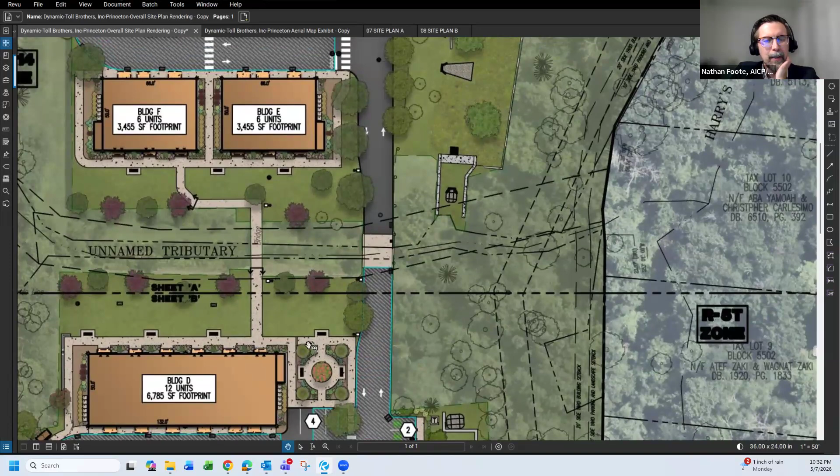Does that go for the pedestrian bridge as well? Yeah, that bridge is 6 feet. And is there ramping — if you scroll a little further up — that would allow access for cyclists? Yep, that's fully accessible. There are no steps in this pedestrian path through the bridge, so that would be accessible for bicyclists as well, should they choose to utilize it.

Well, with that sharp turn, that might be a challenge. And overall — sorry, I'm butting in and other people have their hands raised — but there's a lot of sensitivity about people on bicycles and people on foot sharing sidewalks. So if it's intended to accommodate both, there should be signage somewhere making everybody aware that it's permitted.

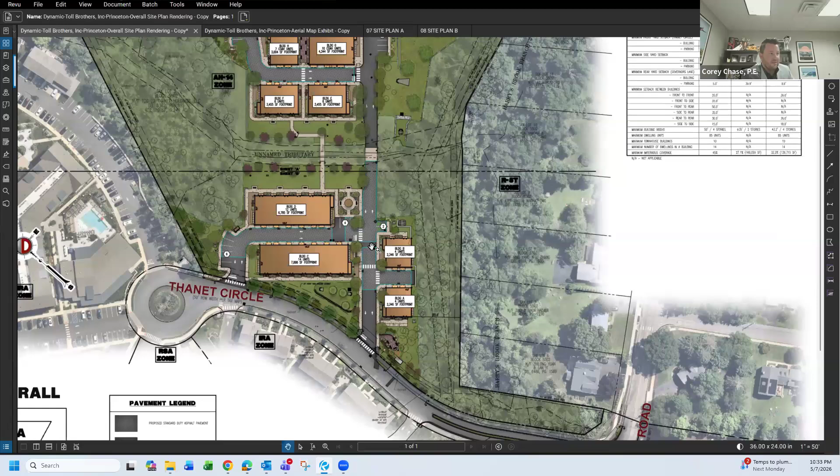Certainly, Madam Chair. I think another alternative would be to apply a similar treatment to what we did on Thanet Circle, where the main east-west aisle that leads from the western portion to the eastern portion of the site could also be striped as a bicycle boulevard with sharrows to delineate that bicyclists and vehicles could share this road. That's right — you don't want to just squeeze bikes and pedestrians into a tiny space and leave all that asphalt just for cars.

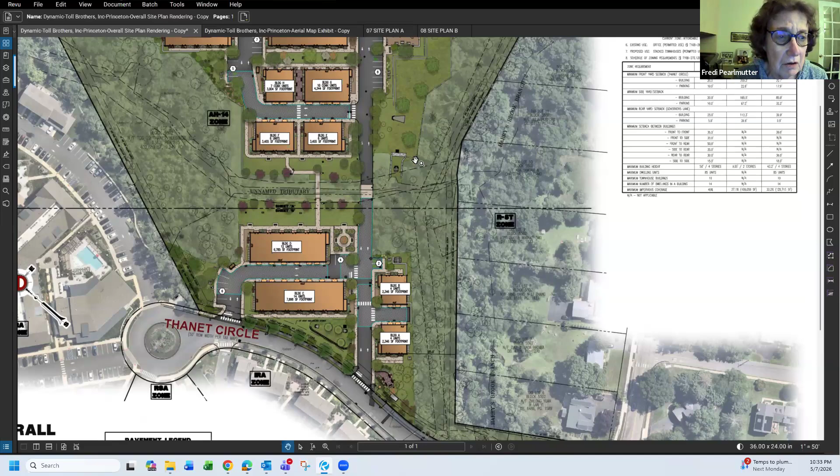I didn't notice anything here about a dog park, and you're probably not the person to ask, but I'm assuming pets are allowed in this building. Where would you think about putting a dog park, on these pathways, for people with pets, as well as for cars and bikes? I mean, they're not that big.

To answer your first question, ma'am, you are correct—I'm not the right witness to ask about dog parks or whether pets would be allowed to access the facility. Certainly with 5 and 6 foot wide sidewalks, those are sufficient width for a resident to walk any pet they may have. But I'd have to defer the question about the location of a dog park, if one's provided, or whether pets are allowed in the facility.

Alex, pets? Yes, pets are allowed. We typically limit the amount of pets that they have, but pets are allowed.

Would you consider putting a dog park in somewhere? I'm not sure if we have room or space to do that anywhere, but we can certainly speak to our engineer and take another look at the layout. I don't want to say yes or no right now—it's something we can look into, but from just looking at the plan right now, I just don't see where we'd even have space to do that.

There's a new dog park in the Alice, across Terhune, that's municipally controlled. Thank you, Chris, I'm aware of that.

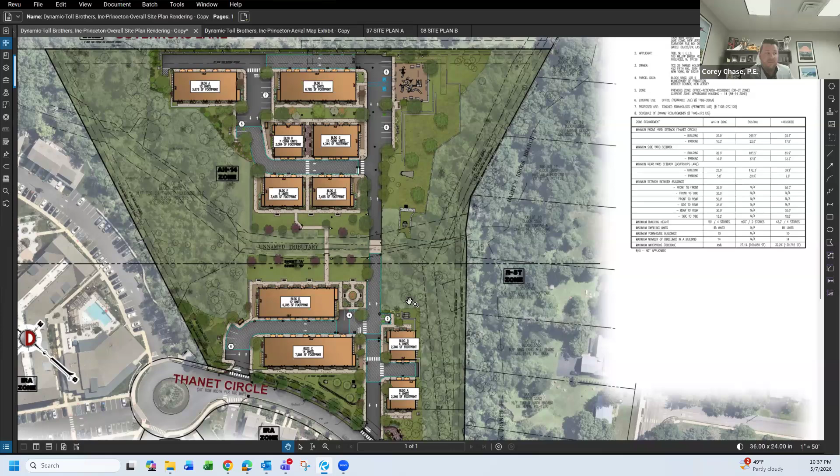Yes, certainly, Ms. Wilson, that's a great question, and we do look at this as a cumulative impact. We did updated traffic counts at Thanet Circle and Terhune Road, recognizing the development that's gone on since we did studies for Avalon Bay, Pearl, and even the Alice. When we did those developments, a lot of things were under construction, so we included a lot more developments that were approved but not yet constructed. In this study, we included 375 Terhune Road, the 30 market rate and affordable townhome development, and 457 North Harrison Street, the 5-story development with about 191 units in totality. We included both in the background traffic—taking the existing traffic volumes currently on the road, adding in the traffic from those two approved-but-not-yet-fully-constructed developments, and then supplementing our traffic on top of that to get an overall cumulative analysis of the impacts on the adjacent roadway network.

Good. That's good to know. Thank you.

Mr. Purcell? Your hand is still up. Forgot to take his hand down again. Sorry.

That's all right, you've got to upgrade your Zoom, Jim. Mine lowers my hand automatically. I don't know how to do that. I'll have to get your input there, David. Well, one of these days you'll try to join a meeting and it won't let you because it will insist that you update, and then you'll have that feature. And you'll be late to your meeting. And I'm using my personal laptop tonight, so maybe it has something to do with it.

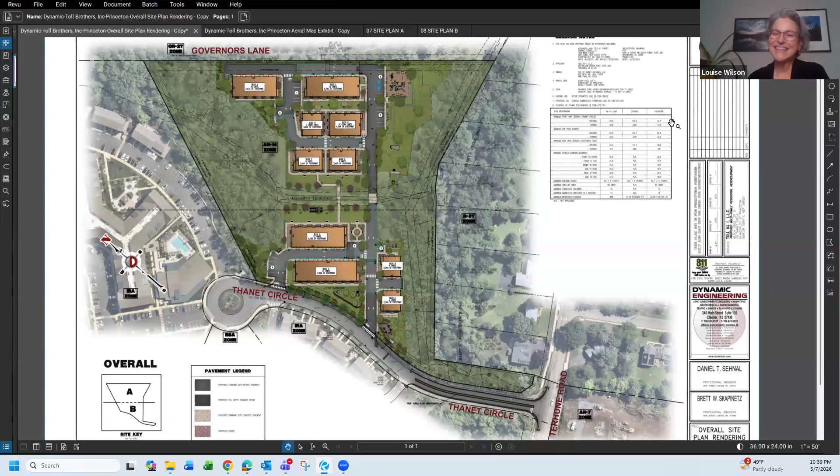Other questions for Mr. Chase? Okay. Who's next, Mr. Tar? Our architect is next. I do think he's going to take a while. So yeah, we've got 20 minutes. We could start and finish up next time. Alex, what would you have me do?

I would hate to let the time go by without using it. Do we have a sense of when the next meeting would be by chance? We do. We just talked about it, based on the agenda for the 28th. Yeah, so we do have one application on for the 28th.

It's always, you never know how long an application is going to last. Even one that looks like it should be short can take long, but we can definitely, I think, schedule it for the 28th. Let me jump in here because I have the schedule in front of me.

We're wide open on June 4th, June 18th, July 2nd, and July 16th. We have one other thing, but on those 4 dates, we're mostly wide open from applications. The 28th, like Nathan said, we do have an application. I cannot handicap whether you would then have 1 hour for this after, or 3 hours, and end up back on June 4th anyway. So if you're a gambling man, Mr. Tar, you may want to go with the 28th, but if you want the certainty of a full night, you may want to go with June 4th. That's entirely up to Alex.